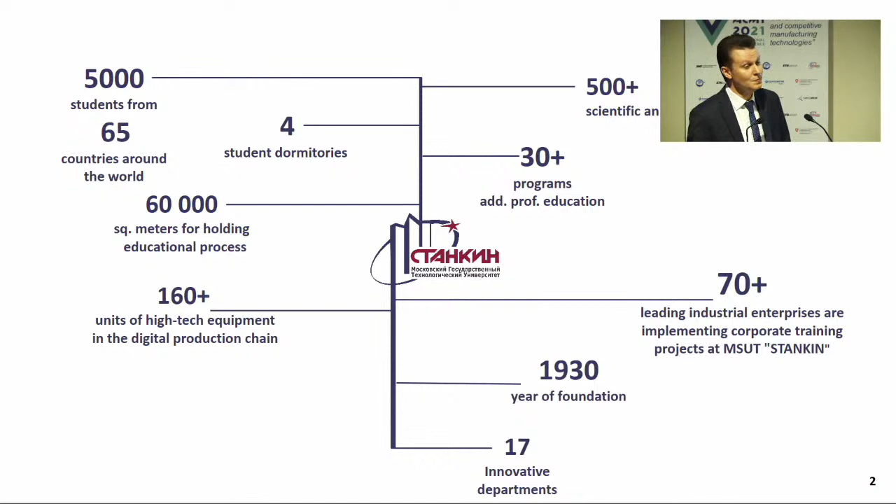In spite of the fact that our university is rather small, we have only 5,000 students and postgraduates, including 800 foreign students from 65 countries of the world.

But we are still a very well-equipped technological university with well-known research schools and graduates.

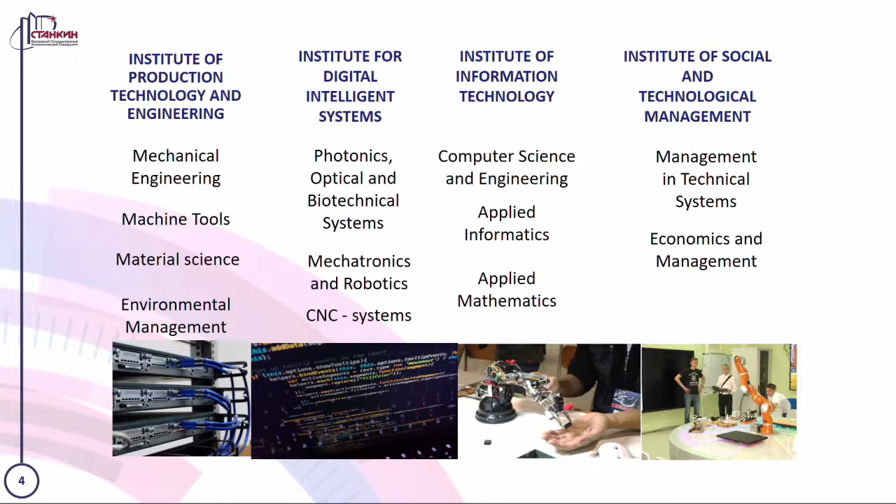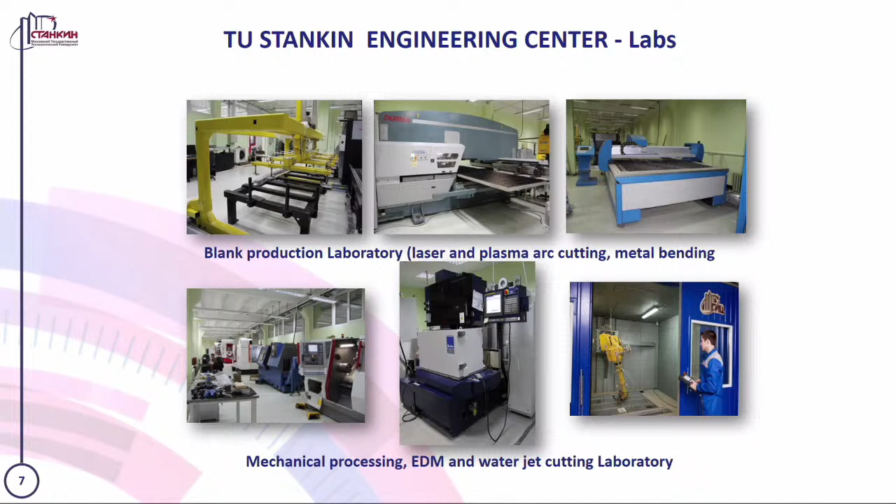Research work takes place in 17 scientific centers and laboratories. We can highlight several research directions: the laboratory of additive production and metrology, blank production processes, machining processes, and also nano coatings and analysis of material properties.

For the last year, in high-rated journals such as Web of Science and Scopus, university staff published, in co-authorship and independently, more than 250 research papers.

Research has been completed on the most relevant trends in developing and implementing additive technologies for making products from composite materials.

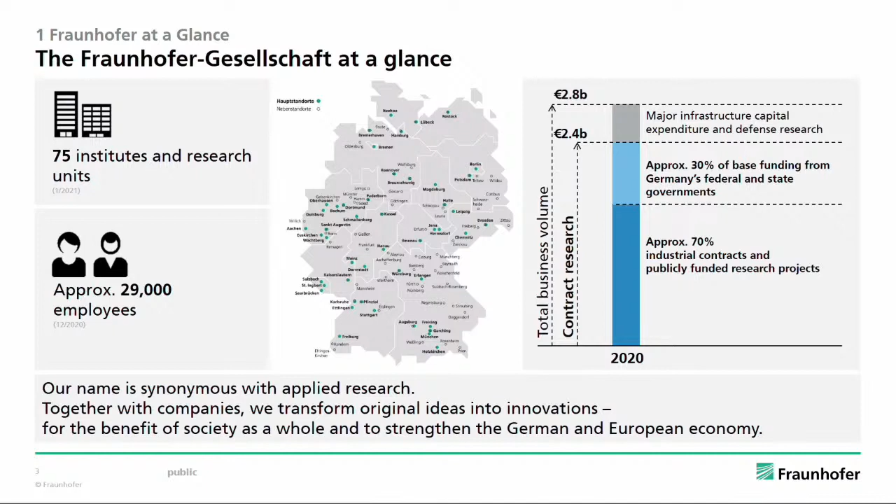The second part is that we win, or that we organize in competition with other organizations, in public programs by the European Union, by the federal government, by the state governments. We call it pre-competitive research with industry. And the third is direct innovation push, exclusive for companies and paid by the companies. This model is very, very suitable to bring innovation push into industry.

And that is the reason that the states want to have Fraunhofer institutes. We increased in the last 6 years by 10,000 researchers and 1 billion euros.

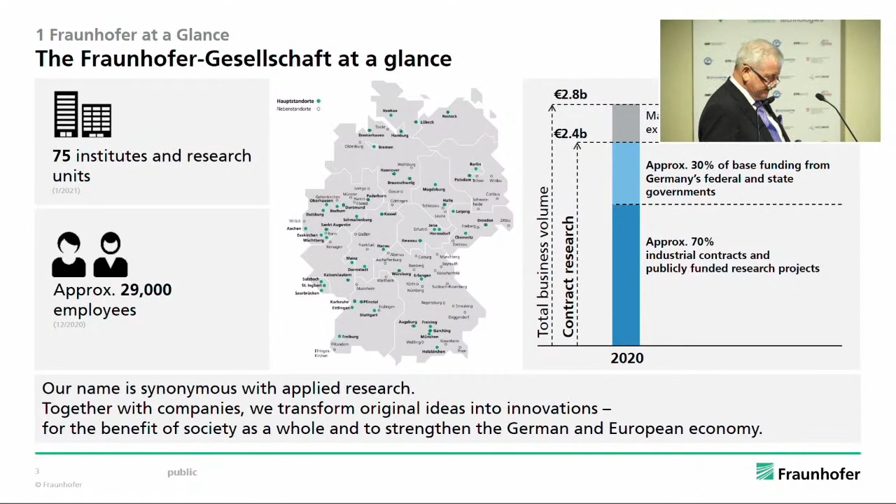Furthermore, we also established 13 Fraunhofer project centers or innovation platforms in Canada, Brazil, Ireland, Netherlands, Poland, Japan, South Korea, Israel, China, and South Africa. Maybe in the future, Professor Kapitanov and Professor Kutin, we could also organize a Fraunhofer project center. It's a temporary organization with researchers from our partner country and Fraunhofer with a common research goal, and the efforts are financed from the German side by Fraunhofer and from the partner organization from the partner country. Maybe we can also organize, as a sign of diplomacy by science, such a center together here in Moscow.

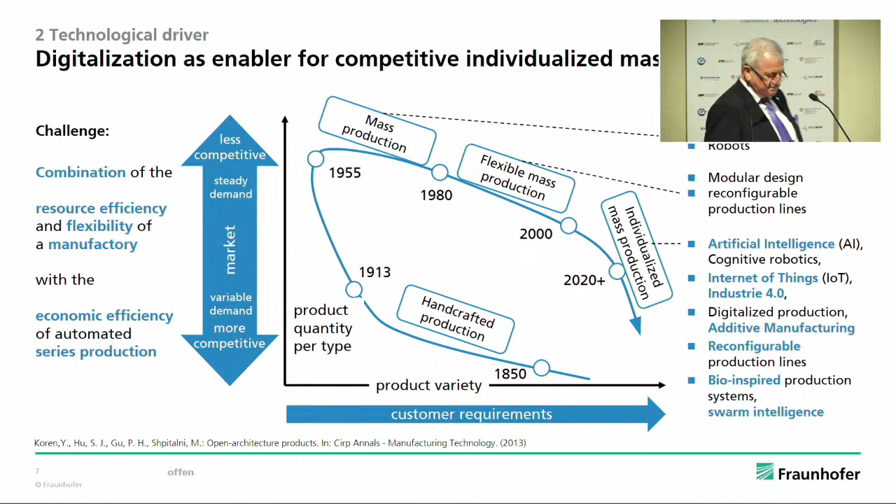Digitization is the key, and it allows for digitally supported and highly variable manufacturing methods that are becoming increasingly important for producing individualized and complex goods in an economic manner, and for being able to quickly adapt to change.

Here is a chart from our CIRP colleagues—Konrad and Andrei Kutin know them—you can see Professor Koren from the United States, Shpitalni from Israel, and other colleagues. They showed in the chart that we come back to the early beginning of production technologies: a high number of products, but every product has a different design, different materials, and so on. That's the challenge.

We can address this through individualized mass production in the future. The precondition for this is to use digitization in production technology, and especially additive manufacturing is a great precondition for this.

Resilience is the ability of a complex system to quickly return to its initial state despite massive, unexpected disruptions, possibly even in an improved form.

In the Fraunhofer Association, Fraunhofer Gesellschaft, we have worked for many years in the field of resilience. At first, resilience was a challenge in infrastructures and in public life. Now, after the crisis, resilience is also very important for production systems and in industry.

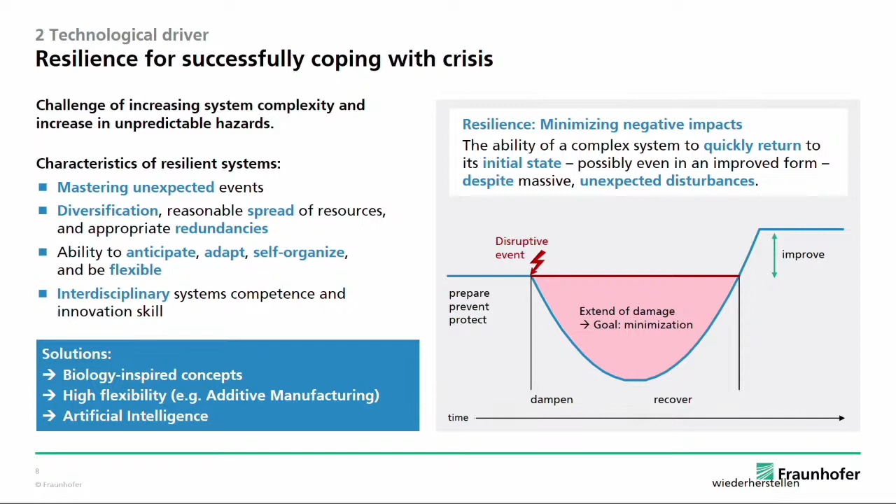We have to look at how to prepare for the event, dampen the dangerous situation, and recover—coming out in a better situation, improving the system or the complete production organization after the crisis.

Biologically inspired technologies, research, and efficient computing is also a great challenge. We work in the European Union in a group called Euro HPC, Euro High Performance Computing. In this club, a lot of countries participate, and the objective in this group is to build up a European ecological system for high performance computing.

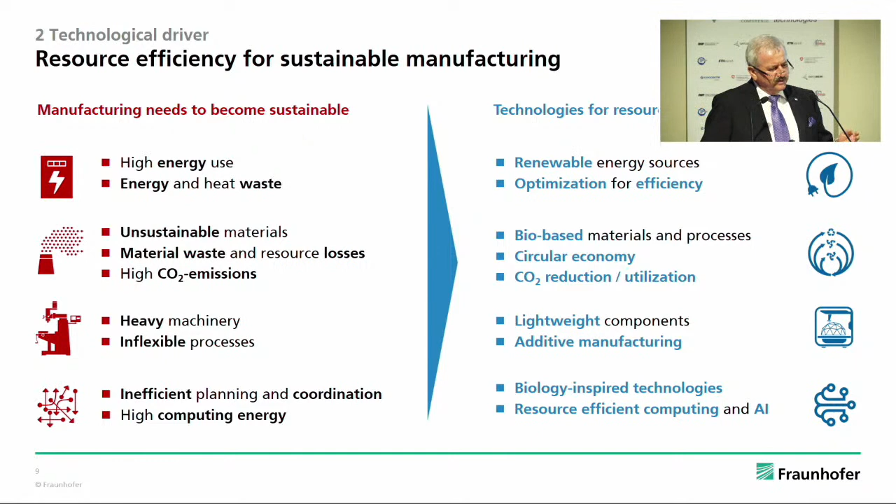In the first wave it was organized that five states got a high performance computer on the teraflop level. It was in Luxembourg, in Czech Republic, in Slovenia, I think in Greece or Bulgaria. And in the second wave, petaflop computers are installed, realized at present in Barcelona, in Bologna, and in Finland.

And in the third wave, starting at the end of this year or next year, we get exascale computers in Germany and in France. The exascale computers have an energy consumption like a factory - it's very high. That means we also have to look for solutions for low energy computing in the future when such high performance computers are combined with production systems.

This next chart relates to energy efficiency, as I've written down on my cards. The question is also, we use artificial intelligence very strongly for production systems, and this leads to high energy consumption.

In the following I would like to show you how the three thematic blocks - additive manufacturing, biological transformation, and digitization for remote manufacturing, a new buzzword after the crisis - how we can find solutions for these three challenges. You can see here in this chart, additive manufacturing is being introduced with a growing number of application areas and brings many advantages. Examples from Fraunhofer you can see here in this chart.

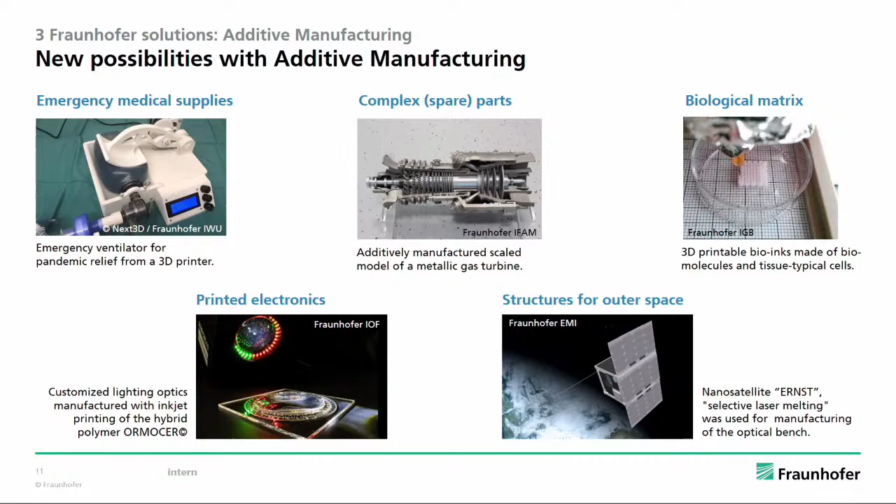The potential of 3D printing has been demonstrated, but the technology is still not fully mature and established. What are the challenges? Fraunhofer is addressing such major challenges within its lighthouse research project, FutureAM, to close the gaps that still hinder additive manufacturing from becoming part of a smooth and continuous process chain.

Konrad, maybe you are an evaluator of this project? Okay, you know more than I do.

The project includes solutions for establishing compatible data formats, enabling a consistent linking of digital and material process chains, improving scale-up, multi-material range, and faster build-up rates, automation for post-processing and quality assurance, and the development of novel software for automated AM component identification and optimization.

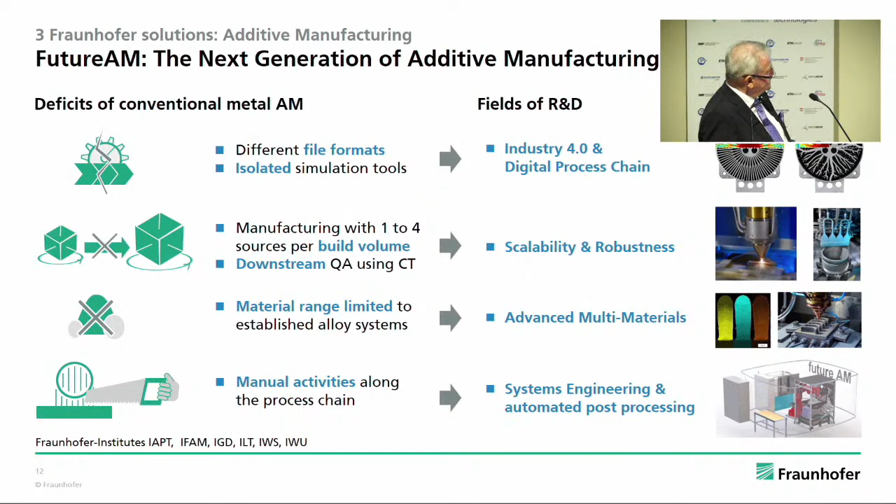Only the consolidation and holistic development of additive manufacturing will achieve the necessary progress for end-to-end economic viability and industrial cross-sector maturity, thus resolving the trade-off between flexibility and profitability. I think you can see the examples here in the chart.

The next topic, the idea of biological transformation, was established in the last couple of years to bring new solutions from specialist disciplines outside production engineering to solve problems in production engineering. I myself can say I was one of the main drivers, Konrad, you know this, also in the International Academy of Production Engineering, CIRP, for this field of research in production technologies.

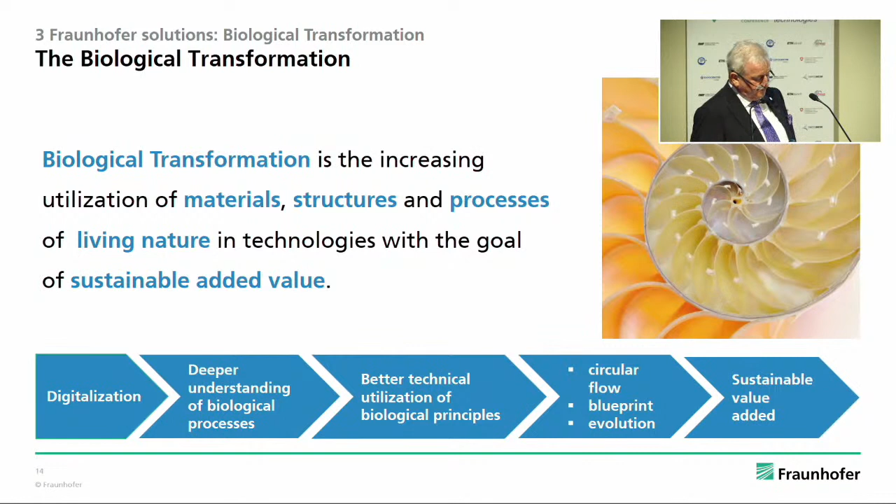Let me give some deeper information about the approach. Through billions of years of evolution, nature has developed many solutions that can serve as models for efficient and effective technologies. These can be material properties, for example lotus effect, structural colors, biocompatibility, or the material composition of mother of pearl or spider silk with extremely stable lightweight properties. Structures and shapes, for example for very good aero or aquadynamics, but also general concepts of nature such as network.

We use swarm intelligence, for example, for logistics in factories, but also for milling strategies in machine tools by swarm intelligence, self-healing, homeostasis, and our circularity process.

Over time, animals and other organisms have developed sophisticated survival and adaptation strategies, for example to camouflage themselves, to get by with as few resources and energy as possible, to protect themselves against attacks, and to survive under adverse conditions. From an evolutionary point of view, all living beings that exist now can be regarded as models of success in design, materials, energy consumption, and so on.

Illustrative examples within the biological transformation are materials like spider silk, bio-based raw materials as substitutes for fossil-based materials, for example in plastics. Structures: nature has developed stable geometries such as snail shells, strong and lightweight constructions like bones, as well as aerodynamic shapes or nanostructures for adhesion like gecko feet, or for weather-resistant colors of butterfly wings.

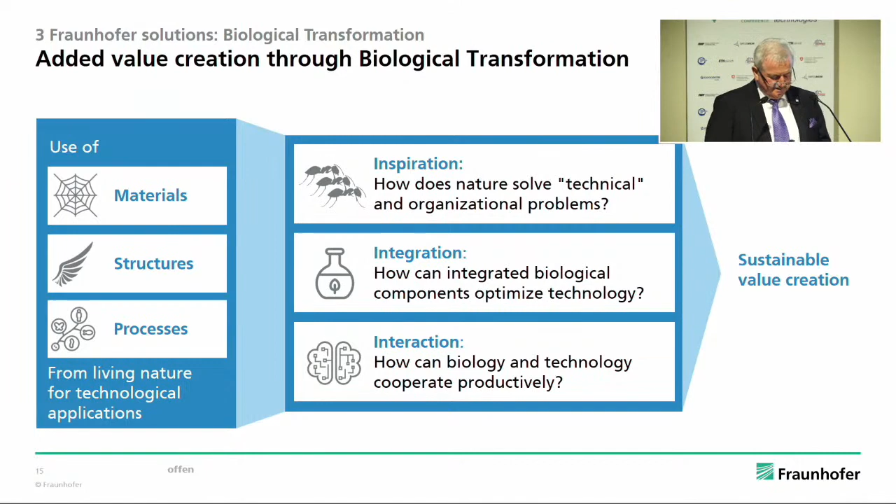Facilitated variation cannot be expressed by several equations that can be applied directly to solve the adaptation and flexibility issues of technical systems. But it serves for a new way of thinking, holistic consideration and optimization. Facilitated variation tells us how to implement traditional artificial intelligence algorithms in this new context. The implementation strategies are oriented along the 4 core aspects for facilitated variation: explorative behavior, weak coupling, conserved core processes, and invisible anatomy.

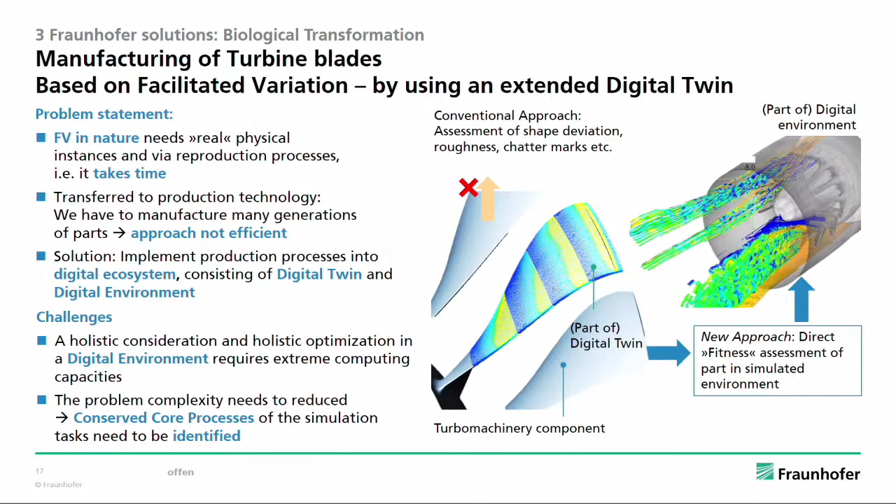And now to digitization for remote, some words about remote manufacturing. As I mentioned at the beginning of my presentation, remote manufacturing is a result of the reaction to the corona pandemic in the last years, and the question is how to minimize personal contact in production companies. Whereas most office workers were able to continue their duties from home during the 2 lockdowns, many factories had to close down or drastically reduce their workforce.

Experience from my own company: in the institutes, we had, during the hardest time of Corona, a presence of around 30-35% up to 50%. In the headquarters we had 15 to 20%, because the headquarters has administration, but the institutes need the labs, and in the labs you need the people.

The situation in companies in Germany was similar to the institutes. Therefore, the question arises if factory workers could someday also take advantage of remote work. Can we organize remote work for the co-workers, for the workers? For manufacturing industries, this could allow for an increase in productivity, improvements in safety and ergonomics, as well as work flexibility and globalized recruitment of skilled workers without the crisis.

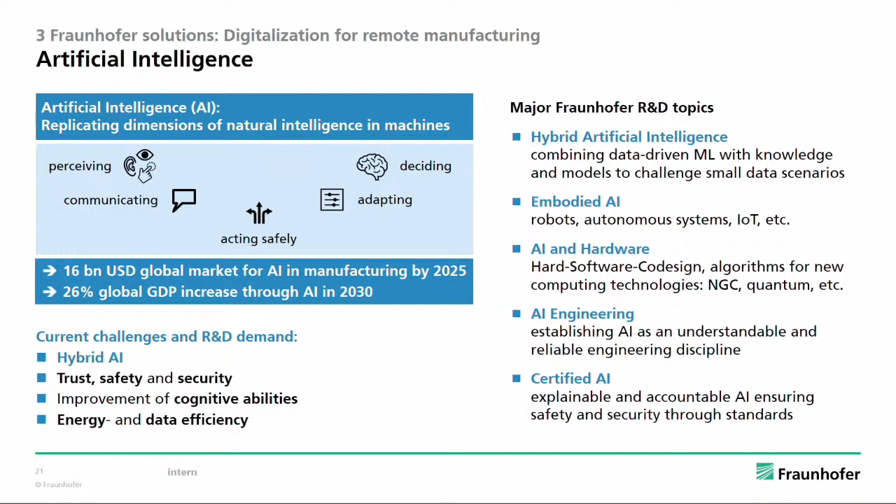In this case, we combine a hybrid technique by data-driven methods like deep learning and knowledge from physical laws or experts. This decreases the data requirement for model generation as well as processing resources and leads to more plausible and trusted models. And now I finish the technical content-related part.

I like to close my presentation with some short brief words on the outlook. Production technology, I think, is also in the future a fundamental basic for society and industry, and will be the backbone also of value creation. Digitization is very essential for innovative and competitive production engineering, and the biological transformation can help us decrease material consumption, decrease energy resources, and also decrease the impact on the environment and the climate. Thank you so much for your attention.

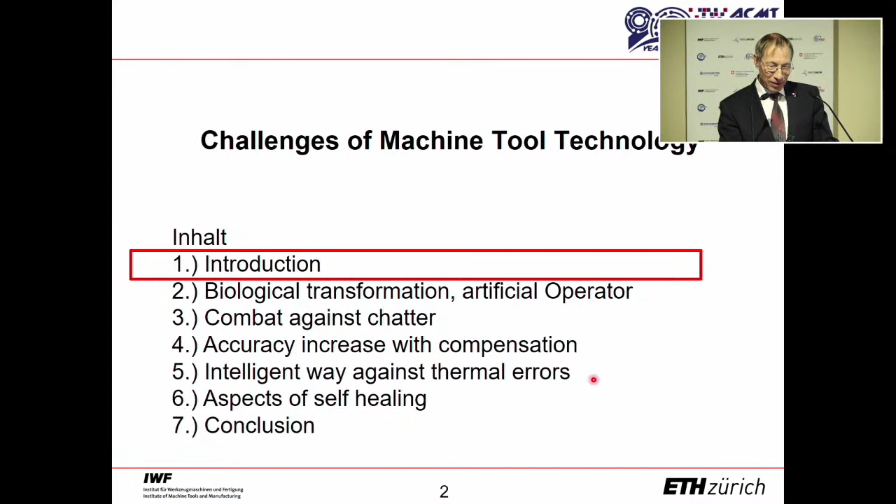Where I want to go here is especially in the direction of the artificial operator. The question of chatter was also mentioned by Raimund, but what can we do in this field of intelligence against chatter? The question of increasing accuracy in a situation where costs are increasingly growing due to the decaying limit benefit when trying to do machine tool improvements in the normal mechanical way - it's nearly not possible. Then the intelligent way against thermal errors, the aspect of self-healing, and I'll end with a conclusion.

So let's start with the question on machine tools. This shows the importance of the machine tool. Every year, machine tools with a value of approximately 60 billion euros are created. Two-thirds of them are cutting machines. This is a really important contribution.

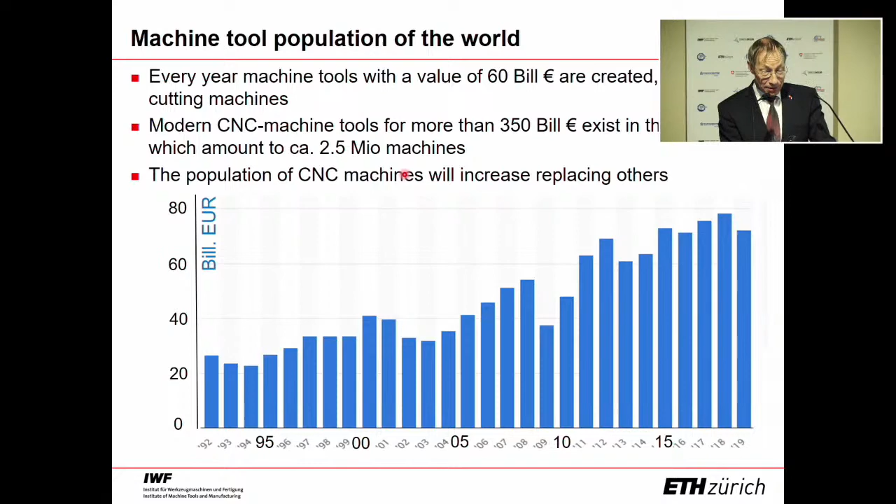That means we at the moment have a population, a value in machine tools existing of 350 billion euros, meaning 2.5 million machine tools are running around the world. For these 2.5 million machine tools, we need technology for the future. We need to apply whatever the co-developing enabling technologies provide. Naturally, the population of these CNC machines will also increase by replacing other low technology machine tools in the world.

Then there is something that needs to be taken into account if we look at productivity and efficiency. Approximately 2 to 3% productivity increase per year is necessary. In the first step, I'll show you what was the source of this increase in the past. We had enhanced tools, machine tool architectures and structures with better performance, chatter resistance, higher power densities in the drives, higher cutting speeds, and so on - a lot of different things that enable year by year this 2 to 3% productivity increase.

And the result is shown here. In former times, for a grinding machine, it was mainly the grinding time that was reduced. But on the other hand, we must not forget the auxiliary process time, especially automation - and I want to address this directly to Professor Kapitanov, who is an expert in the field of automation - automation also plays a major role here. The question is what happens in the future. We'd like to adopt properties of biological systems like sensors, sensor fusion, cognition, machine learning, and so on.

What we also saw is, and this might be one of the major outcomes of additive technology, that they show us how fast setup of a product can be made. But we need to discuss, can we adopt similar technologies for cutting in this field? The so-called 5-minute machine: after 5 minutes we want to make the first chip if we have a CAD model, the same as for additive manufacturing. After 5 minutes we are ready to start production. But if we were able to make the first chip after 5 minutes, milling will be much faster.

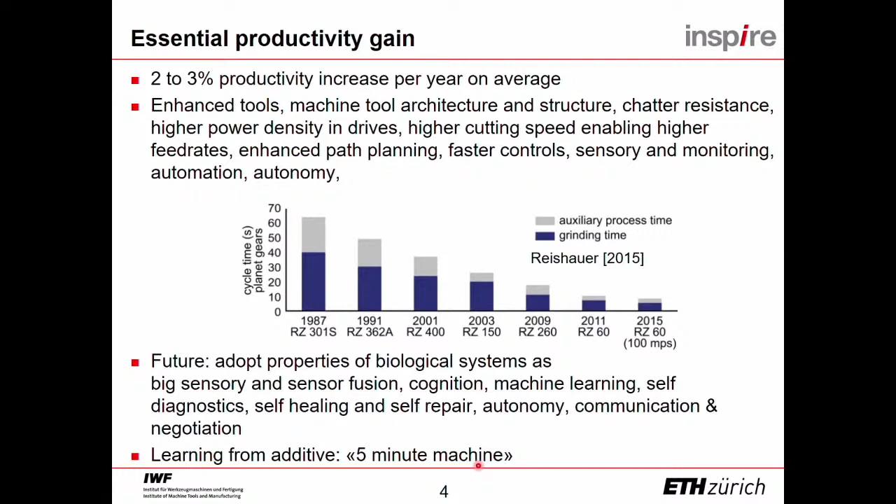And the question is, where is the limit between conventional technology and additive manufacturing technology? Where is the break-even between efficiency, productivity, costs, and naturally also quality?

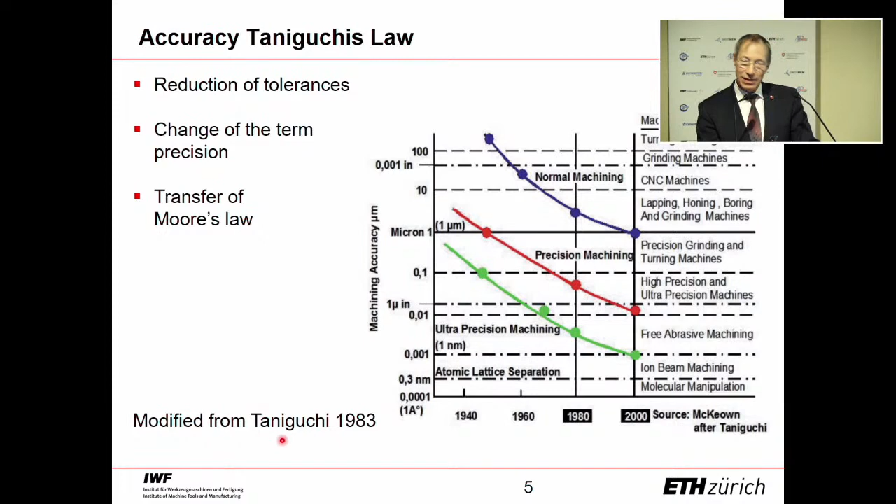Another challenge is the increase of accuracy. This picture is a fairly famous one, created by Taniguchi in 1983. That's why it doesn't last beyond the year 2000, and was somehow refurbished to make it easier to understand by our colleague McKeown. But it shows that machine tools that happened to be precision machine tools back in the 1940s are, in the meantime, normal machines. That means all machine tool manufacturers are in a steady increase of accuracy, reducing uncertainties of machine tools, and positioning inaccuracies must be reduced.

This slide is actually deduced from the so-called Moore's law of increasing structure density. Increasing structure density means we are capable of creating, with less material, a denser storage capacity, which enables us to increase functionalities per chip, decrease the structural size of the chip, and we are heading towards a situation where the structural size is in the vicinity of an atom. The question is, how do we continue this increase of structural density? In the past it was always a question of lasers, of better focusability and structuring capabilities. Does that come to an end? The answer of this slide is: it does not come to an end.

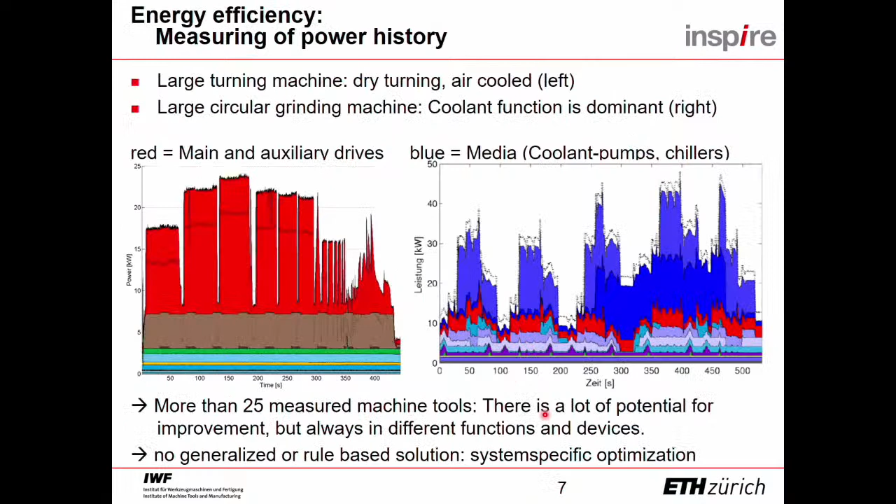We have quite something of technology before us. So we go into the third dimension and, as pointed out by Professor Neugebauer, we find new possibilities to increase the performance of computers. Also, energy efficiency was already discussed, and it was really difficult for us to see what is actually the proposal from academia to reduce energy utilization.

You see that doing the utmost possible for a machine to be prepared for the future does mean that we have a lot of over-expenditure of energy in terms of what we really need. In the end, we find that it is not a general rule that can be applied to all machine tools, it must be treated point by point. But I want to also point out on this slide that energy efficiency, saving energy, and renewable energies is a very important topic.

On the other hand, the Earth is equipped with an amount of materials of different kinds, and when it is used up, it is used up, while energy is supplied continuously by the large power station that we have in the heavens.

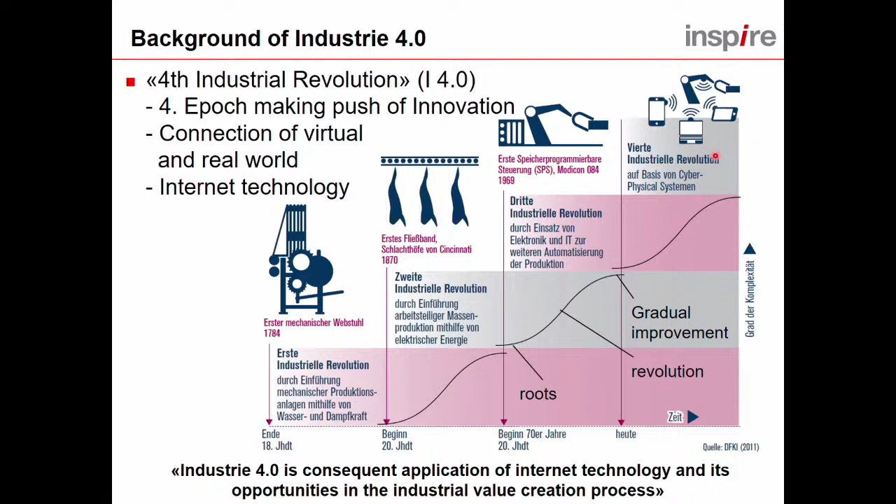Then Industry 4.0, I actually do not need to discuss that with you, this is a challenge that comes up with internet technology. Something really interesting that happens in machine tool technology is that in former times, the control of machines was running as a forerunner to the development of electronics. In the meantime, it totally changed.

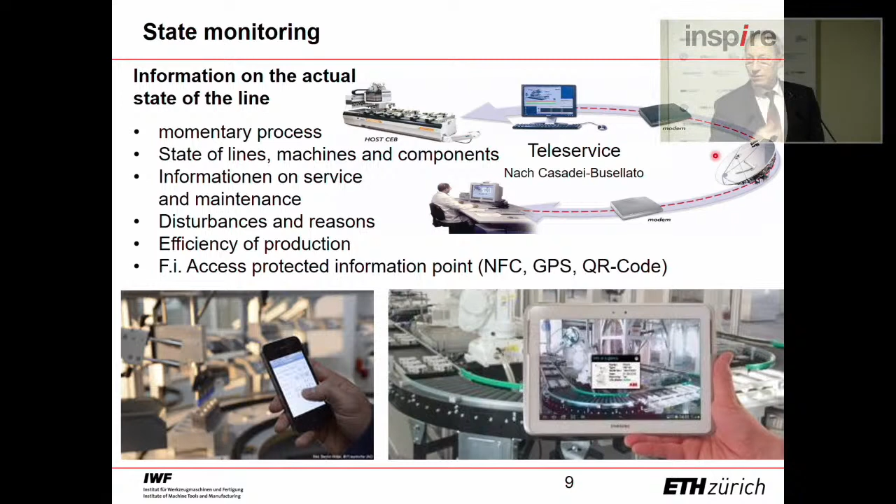What you see here is that we start to control machine tools with actually consumer products, with smartphones, tablets, and so on. The benefit of that is that we are capable of providing, for an extremely cheap price, all the different sensors, actuators, and apps for the users of machine tools.

So with this structure of apps, you can easily take the whole world as your development group, developing new performance, new programs for the machine tool.

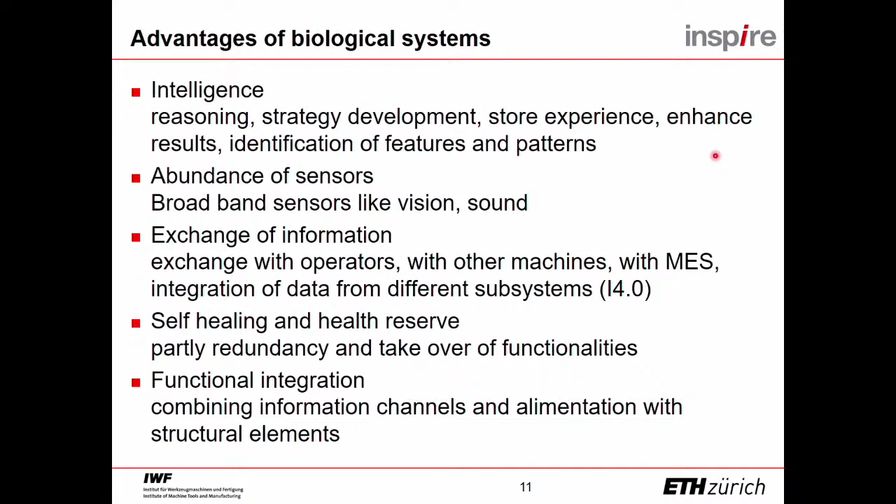So then I go to the biological transformation. When we started this, Raimund, we discussed whether biological systems are actually superior to our technological systems. And the truth is there are some aspects where they are much inferior to what we are doing. There's no horse running at 250 kilometers per hour, and I also do not know a whale capable of carrying 16,000 containers over the ocean. So in terms of power, force, and speed, biological systems are by far inferior to what we are doing technology-wise.

The question is, what can we actually inherit from biology? This is mainly intelligence, the possibility of reasoning, strategy development, and so on. Biological systems typically have an abundance of sensors. On a square centimeter of our finger, we have 10 sensors for coldness. The question is, what can we do with that?

The exchange of information, we are extremely efficient, even over several thousand kilometers from Zurich to Moscow, and also to Munich, respectively Dresden and Chemnitz. Then the question of self-healing, and this is something we'd like to point out later on, because a lot of things we can inherit from biology have no value without this possibility of self-healing, and then functional integration.

So if we discuss materials, for instance, what is the performance of a normal tree trunk in comparison to our fiber-reinforced materials? There, our fiber-reinforced materials are by far stronger than the tree. The interesting thing is adaptivity to the environment, and naturally the functional integration, that the tree trunk is not only there for load carrying, but also for providing nourishment and providing information to the tree. So these are the 5 topics we really need to deal with when we discuss biological systems.

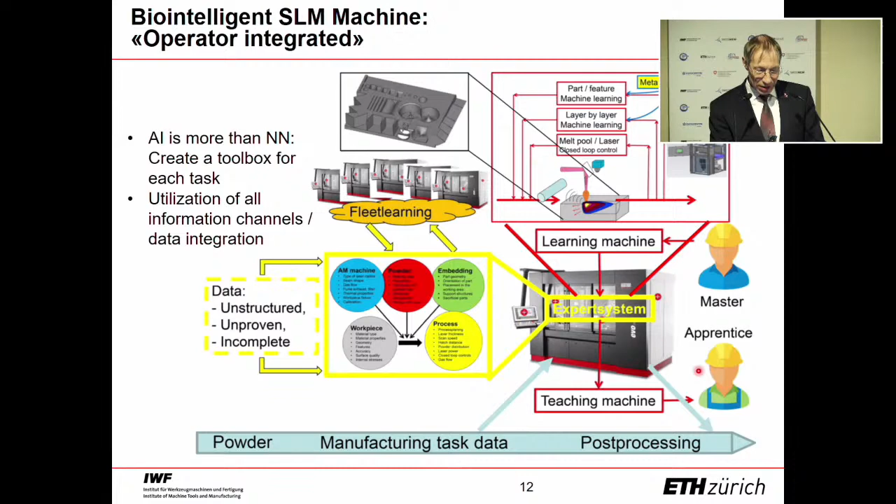Yes, we can make a plausibility check. The question, and this is something really important, is that at this place ethics comes into play. In all topics of this biological transformation, ethics becomes a major topic.

So then we need some monitoring, which you see here on top. We have three cycles that the machine tool is capable of learning. It starts with a normal closed loop control. Normal closed loop controls are not artificial intelligence, but they are anyway something like adapting the machine tool. But we have different layers of machine learning that are stacked above these, and it's important to see that this is a technology for individual parts.

So it is not useful to teach individual parts. It is useful to make a feature recognition, feature separation, and to teach these individual features that can be reused to make this geometry. So here, fairly swiftly, one possibility of sensors, and this is something also that is bio-inspired.

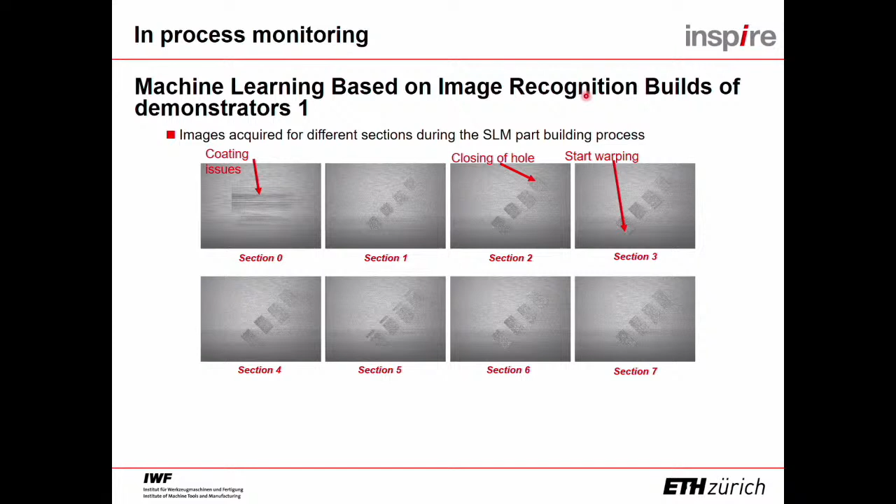We have eyes, we can look and have the possibilities to recognize colors, to recognize the full field of what's happening there. Especially optics and acoustics are sensors that are really capable in biological systems. That's why the higher biological systems are equipped with that.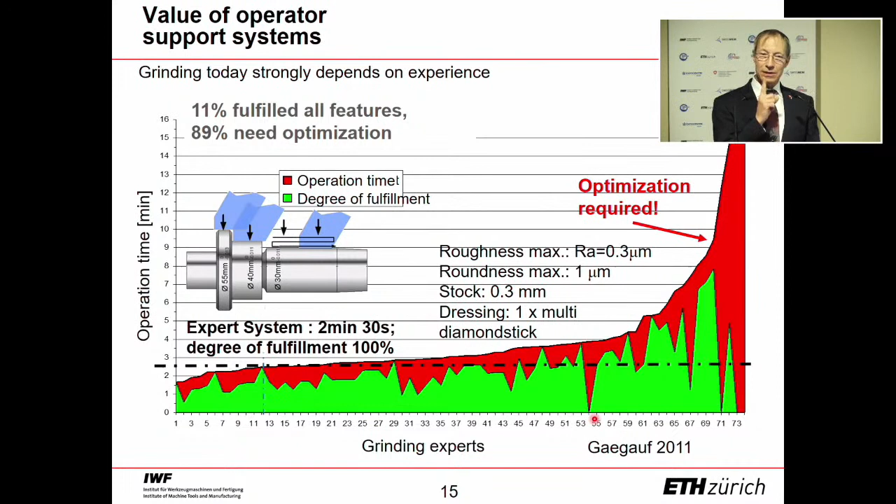experts need iteration. The second interesting thing is that in terms of a fairly crude expert system, we are capable of being better than most of the experts. So only 11 experts in this test were better. And that means that an expert system is something really valuable in terms of increasing productivity, in terms

of also reducing the energy expenditure, because during the time where this machine tool is being set up, you need to supply energy to the machine tool. The last thing is that we can do it better as humans than this expert system. So the learning ability of the expert system is something that is really important.

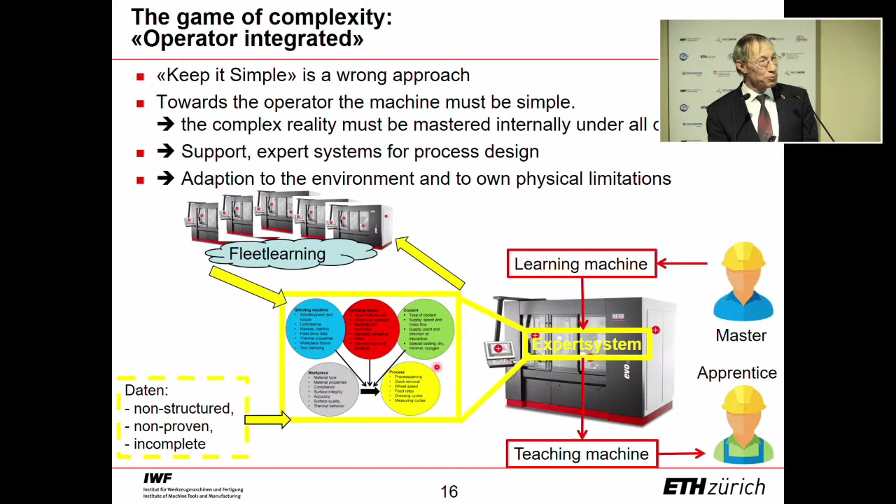And with this slide, I want to point out that it's exactly the same structure that we use. I also want to point out that the approach 'keep it simple' is a completely stupid thing, because the problem with keep it simple is that we have to cope with the full complexity of a manufacturing process, and manufacturing processes are complex.

Therefore, if you want to interpret this slogan 'keep it simple' correctly, it must be keep it simple towards the operator, but then the machine tool needs to fulfill all the problems coming up from the complexity, which is actually the task of having persons or having the operator integrated.

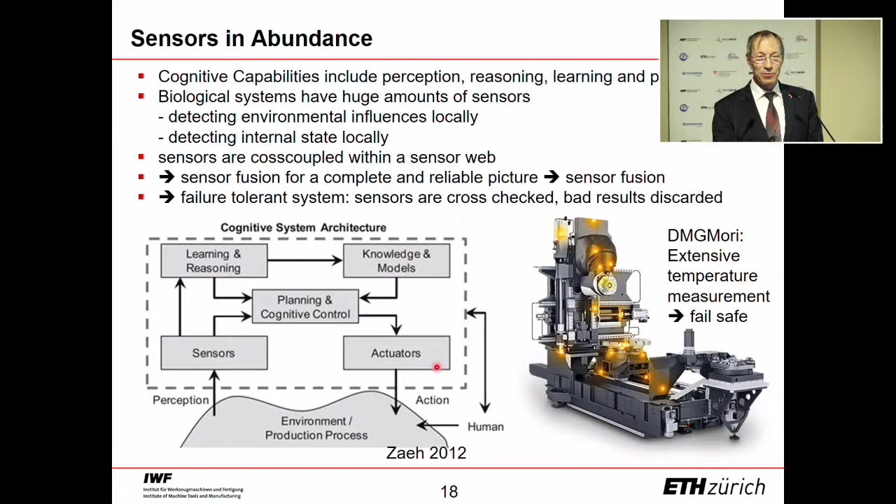Okay, so then sensors in abundance. When I started discussing temperature compensation of thermal errors on machine tools, and I asked the Swiss machine tool maker, I would like to have an additional thermal sensor, temperature measurement sensor on the machine tool. They said, no way. The sensor is an additional component that first costs money and second increases the downtime of the machine, so we shall not do it.

In the meantime, some six years elapsed since that time, and you see that even large machine tool makers make advertisements with a large amount of those temperature sensors to really gain control over the performance of the machine. It's interesting to see that in the meantime we learned that, for instance, sensor fusion is something that's interesting. We combine the information coming out of different sensors, and we are also capable of making plausibility checks.

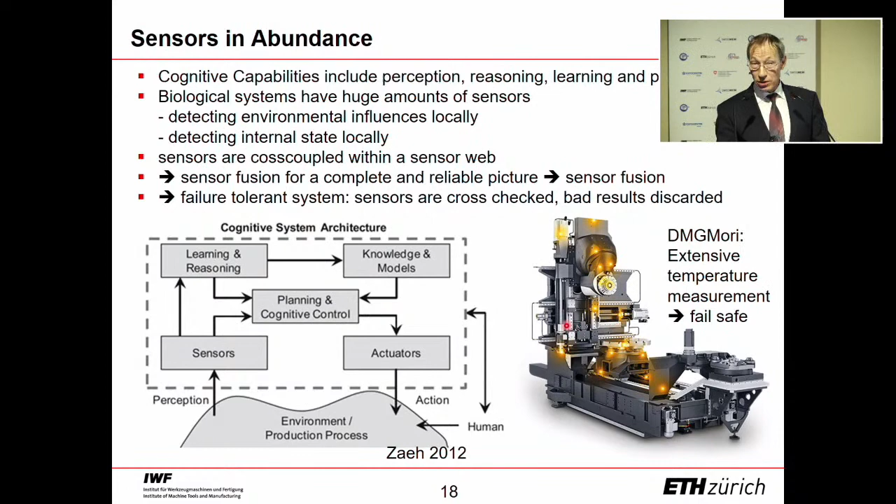So if one of these different temperature sensors fails, the other ones can check whether what's happening is plausible, and then mute that sensor, as we are doing day by day with the sensors that we have at hand.

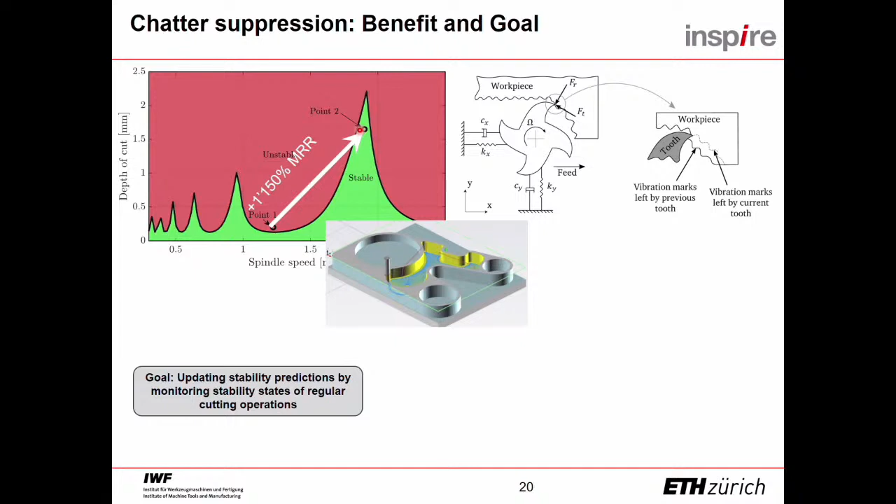Then the question: chatter happens at different places in different ways. So the goal is updating the stability prediction by monitoring stability states of regular cutting operations. The machine is cutting at different places, and naturally the stability is different at these different places. We measure at one place, another place, a third place. Then we ask ourselves, what is actually the updated prediction?

And in the end we find perhaps something where all the chattering points are sitting outside of the line and the non-chattering below. Then we achieve the possibility of exploiting the gaps between these stability lobes where we achieve higher stability. The problem is that these lobes are changing very fast, without any knowledge of a human person.

And the topic is that chattering in machine tools is one of the most researched topics in manufacturing at all, but there's no industrial solution available still.

So the question is, what shall we do? Now the savior of all our technical problems is coming up: artificial intelligence, self-learning technologies.

We have two possibilities to deal with the problem. We have this analytical approach with physical modeling, but the problem is low prediction accuracy. On the other hand, we can use a data-driven model, but this requires an unaffordable demand of experimental data.

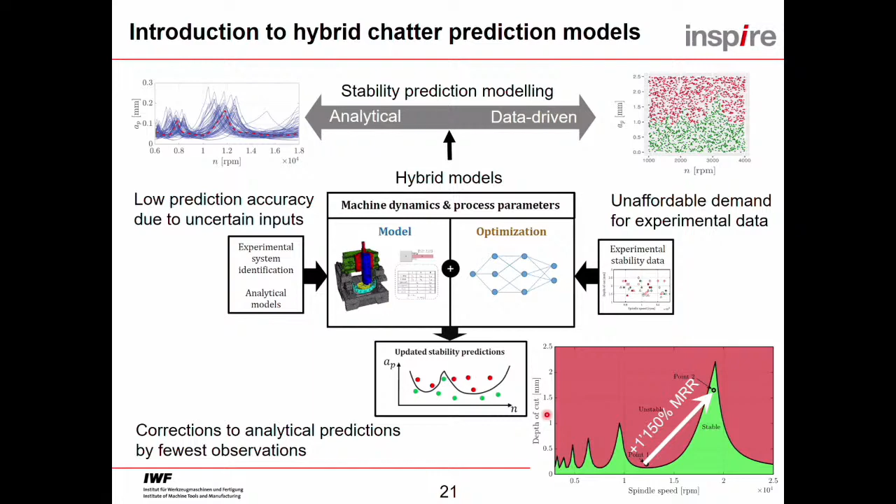So the solution would be something in between, to combine the benefits of both: a model with database optimization. In the end we will be capable of adapting this stability lobe diagram from whatever the machine witnesses.

And then we see that it is necessary to teach these models as an artificial intelligence topic. Besides this network, we have model inputs, and out of these model inputs we generate a stability model. This enables us to predict.

And then we compare our experimental data: does it chatter, does it not chatter? So we need the sensor on top, compare it, and then reorganize or retune our network weights.

The problem here is that we cannot exploit each and every experiment, because we have something like a digital situation that needs to be learned: either it chatters or it doesn't. If you predict chatter and it chatters, you've gained nothing, you only gain something if you have a contradiction between these two models.

And then comes the problem: machine tools are changing on purpose. We want to exchange the tool, exchange the clamping situation, and that means in the end we end up with a lot of different models that need to be tuned, giving in the end a stability model as a physical combination of these different models.

So physical combination of these models is something essential to win over the variety of these different equipments of machine tools.

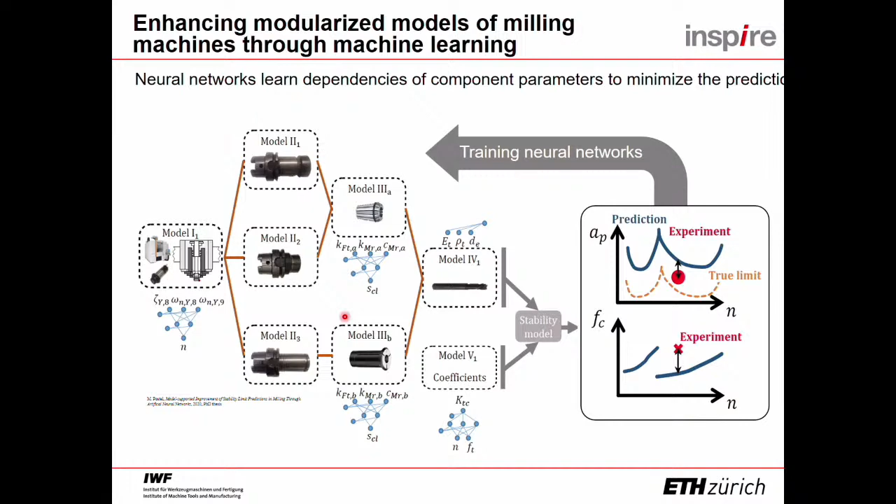And then the question is, can we enhance that? Yes, we can. So what we propose at the moment, in collaboration with an industry partner, a control manufacturer, is this Ensemble deep learning.

That means we start with a lot of learning of neural networks, trying different starting points, and gain different results. The first thing is the original predictions you see here, the analytical model prediction, then we have the training of the network with these different points.

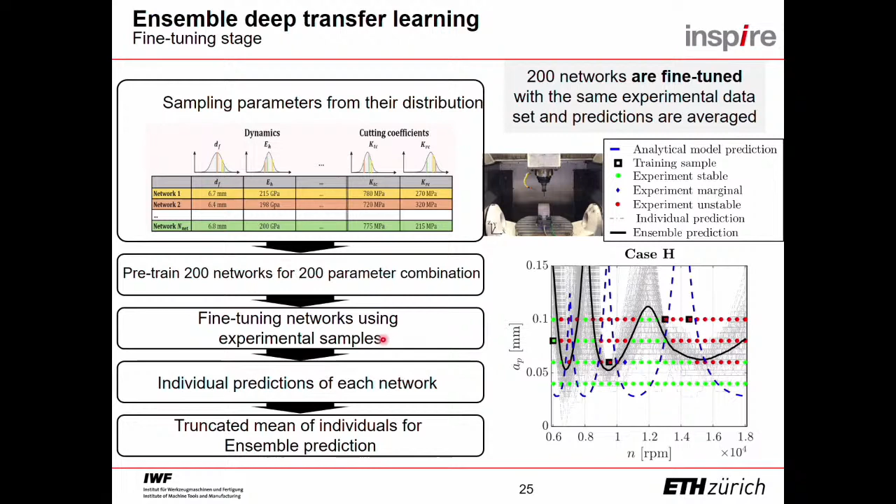In the end, we get individual predictions for any different setup of this artificial intelligence network, and the goal is to average out these different events from these different trained networks. Does that really help? Yes, it does. The green is the non-chattering part, the red is the chattering part, and they are clearly separated by the black line.

So then, compensation. The question is, how do we compensate machine tools? The necessity is to rethink the machine tool at this point, because you can only compensate what is predictable.

And if we ask for design for compensation, the first task is to have repeatability. The second task is to have repeatability. The third task is to have repeatability. Nothing goes over repeatability. Only if it is repeatable, and this is what we need to achieve.

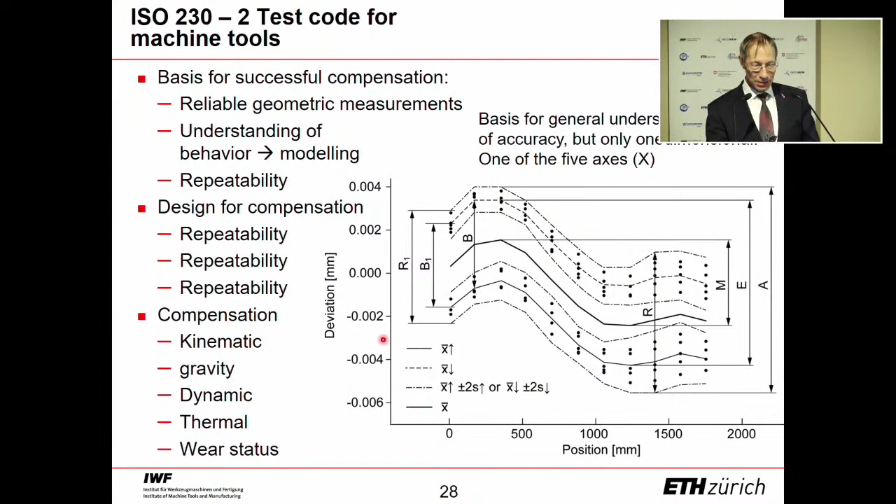If the machine tool is repeatable, we gain possibilities to enhance it by compensation. Then the question is, what all can be compensated? We can compensate kinematics, gravity, dynamics, thermal behavior, and wear status.

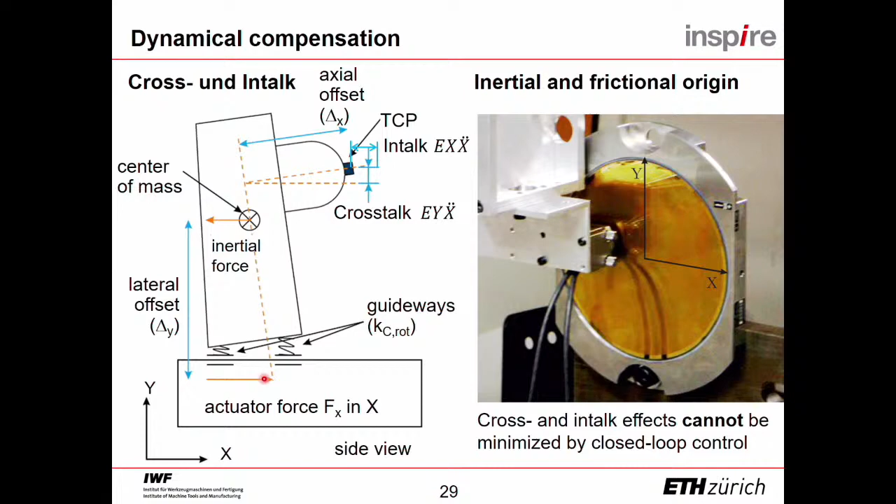This shows the dynamic compensation, compensating the crosstalk coming from the distance between the center of gravity and the attack point of the drives. This can actually be predicted, and this is something that is deterministic and repeatable, and can be used for enhancing the accuracy of the machine tool.

So the problem with model-based enhancement of machine tools is that we typically have models that are far too complex to be evaluated in due time. Therefore, it is necessary to have advanced models and meta-modeling. This is the task that we look for in each and any compensation strategy.

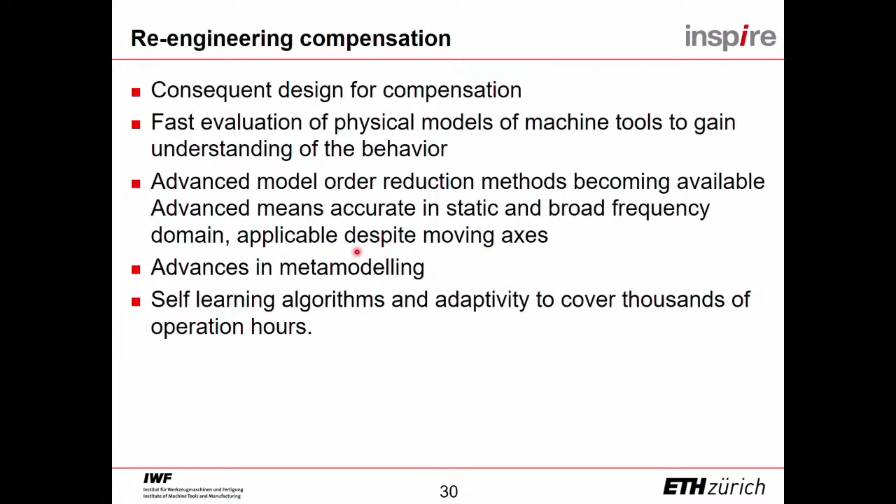I want to show you a possibility for dealing with thermal compensation. In old times, so-called resource-based technology asked for air conditioning of the job shop where we put our machine tool. Now we want a machine tool capable of ultra precision but operating in a standard environment to save energy. Therefore the only possibility is to be a little more intelligent and prudent: have models, know how the machine will behave, and set up physical models.

But the question is, are these physical models sufficient? Here I show you how any compensation strategy works, something like a morphological box. We start with sensor technology - and excuse me that I include the NC program as a sensor, because from the NC program we know how the machine tool needs to behave. Then we have the intelligence of the model, and an actuator technology, which should be the axis of the machine as far as possible.

Perhaps also some additional axis, but we prefer to use the same actuators we'd actually like to have. Here you see physical field equations that require a lot of evaluation, so it's interesting to move toward reduced models with reduced information content compared to the physical model. But then we need something different to enhance this model, so we ask for different sensor technologies and put it into some reduced modeling.

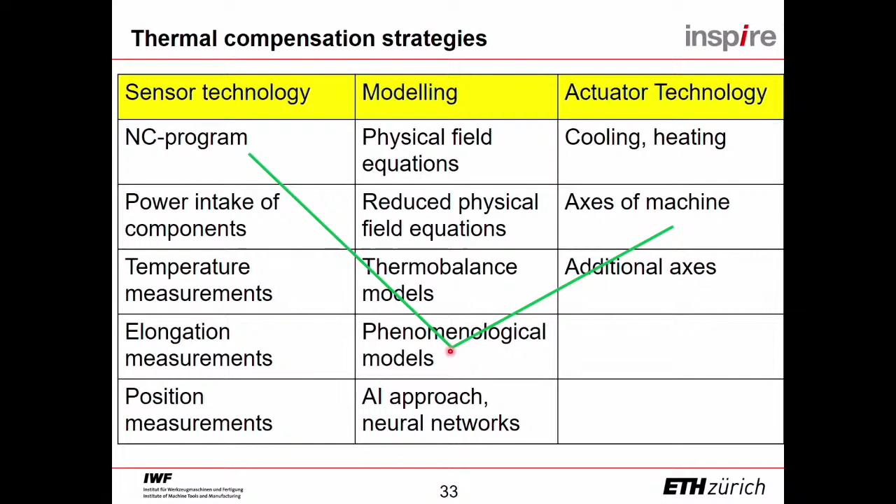I'll show you this phenomenological modeling in a few seconds. The question is what can be enhanced to make this phenomenological model work, and how does a phenomenological model work? So we have a physical equation, and this physical equation is complicated.

We reduce it to a simple first-order differential equation. This contains at least the history from this compensation technology, and all the parameters here need to be adjusted by parameter identification.

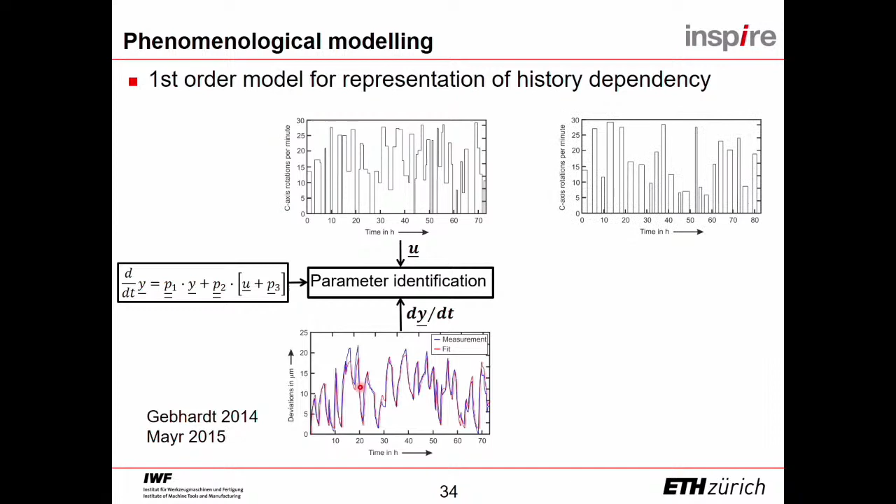So we ask for movement of the machine tool, we ask for the deviations of the axis positions, and then we make a parameter identification. If we've done it well, we get a very good comparison between those two things. Then we take another one, use the same prediction, and in the end check by measuring whether it happens or not.

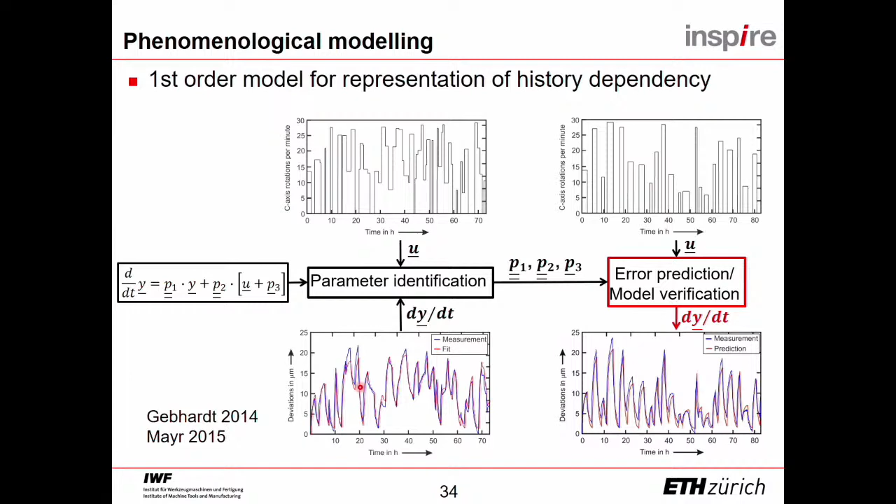You see that we have approximately 80 hours - a machine tool that only lasts or works for 80 hours is nothing. So what we need to do is retrain this model so that the parameters we identified become adapted to the situation of the machine tool. This is how we do that - this is the utilization of the model after training. Then, from time to time, we measure the position of the machine tool.

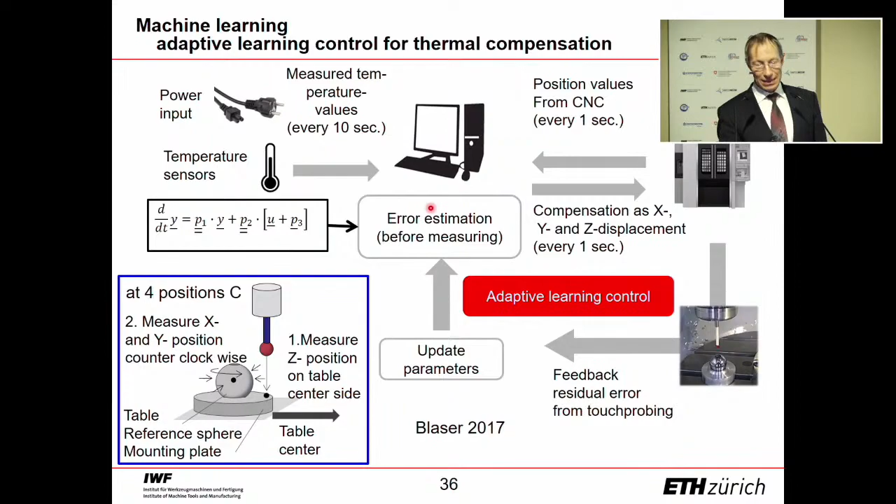After measuring the position of the machine tool, we feed back this information into our model, and then we have a new model, and this actually lasts forever. So let me skip some of the slides, otherwise you get nervous.

The last thing I want to show you is the self-healing topic. We generated some surfaces that are functional surfaces, known from the lotus leaf, that show super hydrophobic behavior. But when you touch the surface of a lotus leaf, the super hydrophobicity is gone. The only reason this plant survives despite touching is that it is capable of regrowing the performance of the surface. So when we discuss functionality, we need to discuss the regrowing, the self-healing topic.

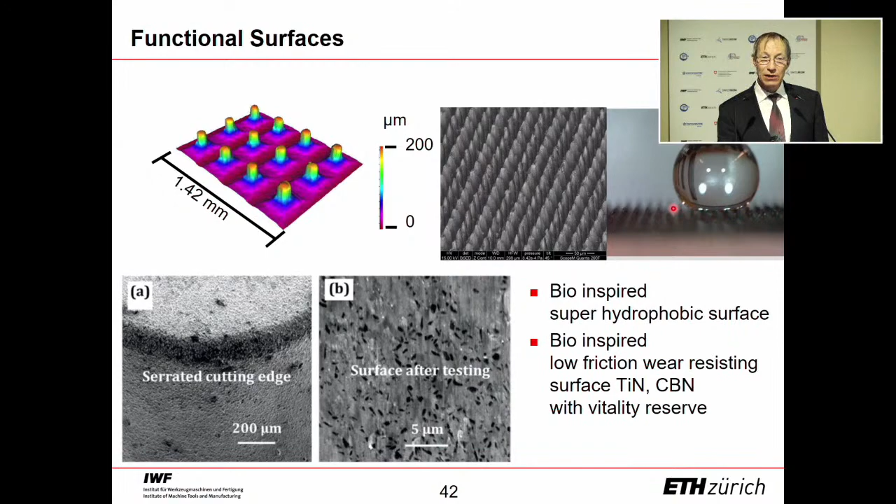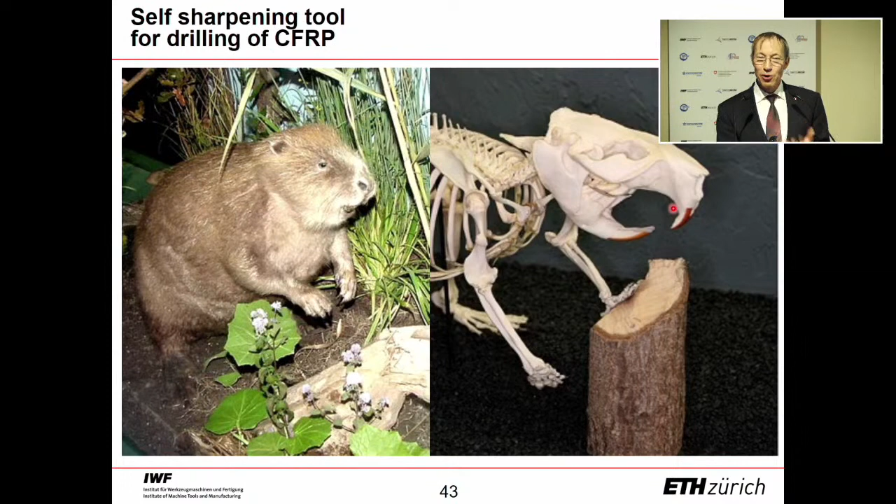I want to show you one aspect of self-healing. This is a beaver. The beaver has teeth that sharpen themselves. If the beaver does not cut wood, the teeth grow ad infinitum until the poor animal dies. This is interesting for machine tools. We would like machine tools that are self-sharpening, that keep their sharpness due to the wear process. The problem is we cannot grow the material from which the tools are made, but we can move the CNC axis so that the length of the tool appears longer after some time.

Let me come to the conclusion. All these artificial intelligence topics are somehow here in this so-called Gartner hype cycle, dropping down into the trough of disillusionment. We had that for artificial intelligence some time ago, the so-called artificial intelligence winter. The question is, what are we as researchers doing? We need to act in this situation, because here we are capable of bringing things into the industry.

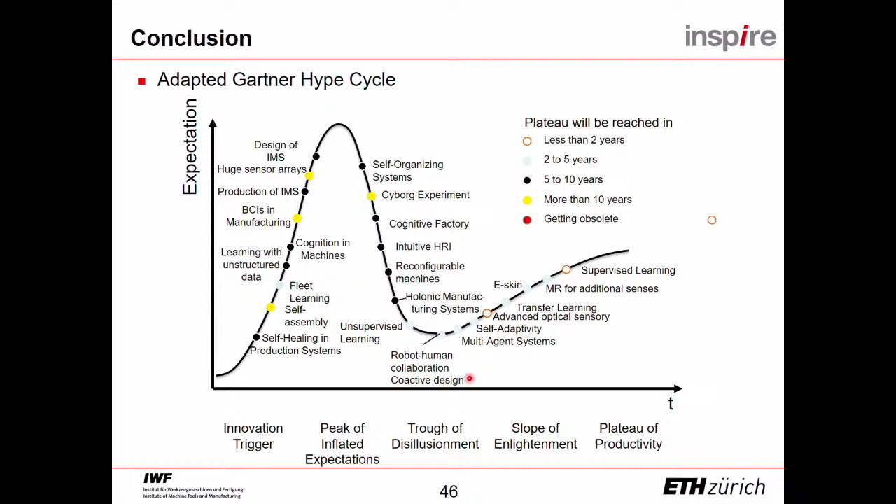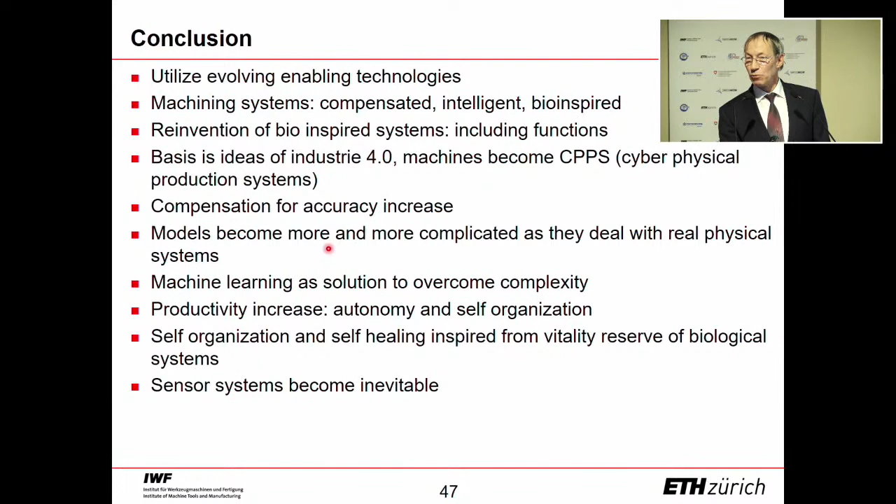So I come to the conclusion. The important thing is that we use the evolving enabling technologies. Naturally, the machining systems become compensated, they become intelligent, and they naturally become bio-inspired. I want to show you that compensation for accuracy is something necessary to be done, and we need to have models. These models become more and more complicated, and that means we have to introduce these artificial intelligence topics. Thank you for your kind attention.

Thank you very much, Professor Wegener, for a very interesting report. We can imagine that you've done a lot in your institute, but it's really very interesting. I think maybe we shall invite you for our students to make a lecture or two lectures in this field. As an honorary doctor of this institution, I'm obliged to do that. An honorary doctor should work a little bit for our university too.

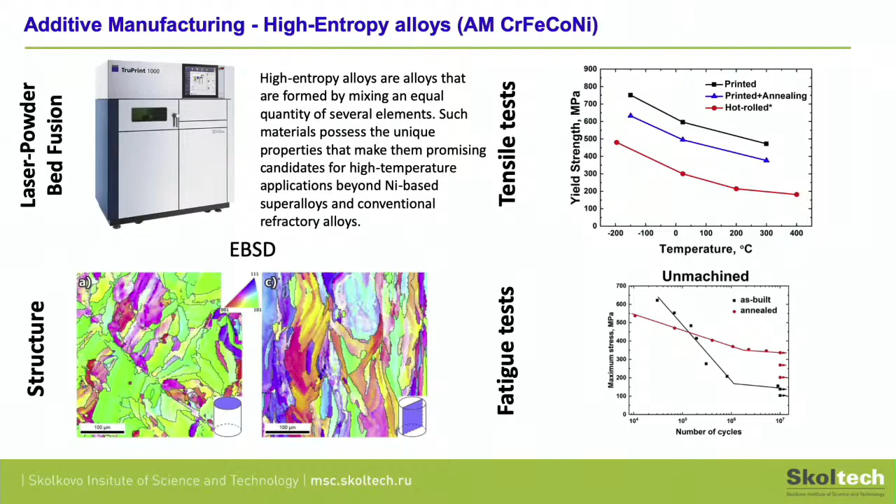This is something to be studied, and that's what we are doing, trying to compare as-built and annealed products. I'd like to underline, since there's no physical background on this, a lot is done in the labs by experimentation. After that, we normally put it in high pressure torsion, aggressively squeezing this material, and it shows that the prehistory from additive manufacturing is destroyed because of this. All this domain structure is ruined in the same way it would be if it were casted. At the very end, the horizontal line, the limit, is achieved the same in terms of micro hardness. So the material is forgetting its prehistory, how it was created, which is also important to learn and understand the consequences of what we're actually doing.

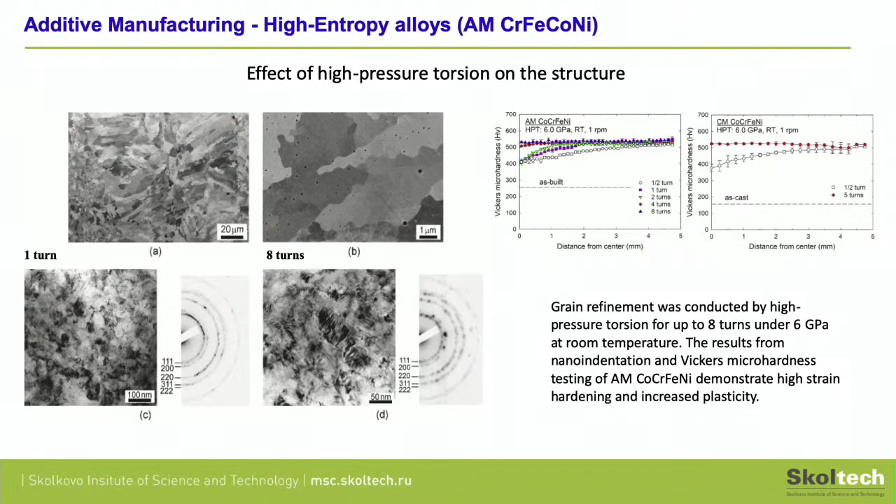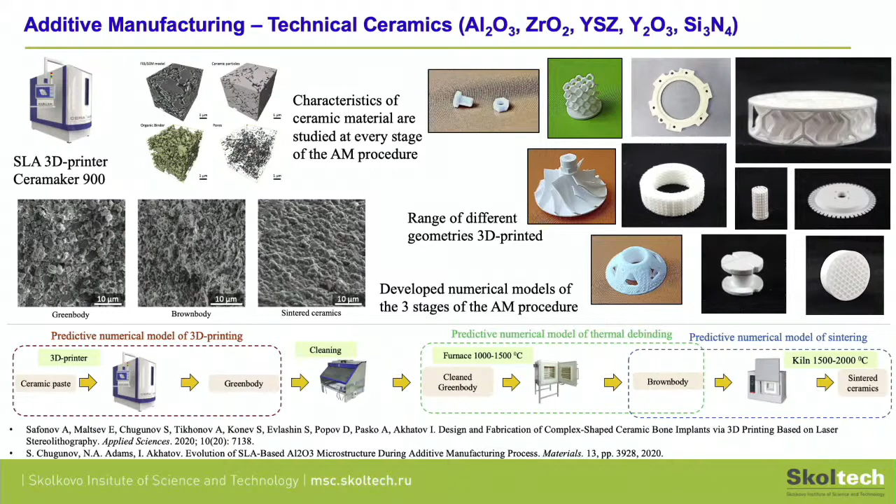This is a piece of art, how to do it, and it resonates exactly with the point you mentioned, that a qualified operator is supposed to be attached together with this machine. It doesn't work like you push a button and get the result. But after this learning, we found it's important to understand how the structure of these materials changes, and we do this including mathematical models of all these processes - digital twins of all three steps: predictive numerical model for 3D printing, predictive numerical model for thermal debinding, and for sintering. There are several different time scales of these processes, and we develop all these models to be able to predict the final product before it is printed.

Now, the third one in additive manufacturing, which was well mentioned today, is a very poetic application: we print with lunar regolith. This is interesting. Someone might say, why do we care about that? Well, like everybody, we're dreaming now that we would like to fly to the moon one day, maybe our kids, maybe our grandkids, and in that moment we would like them to know how to use the material they find on the moon.

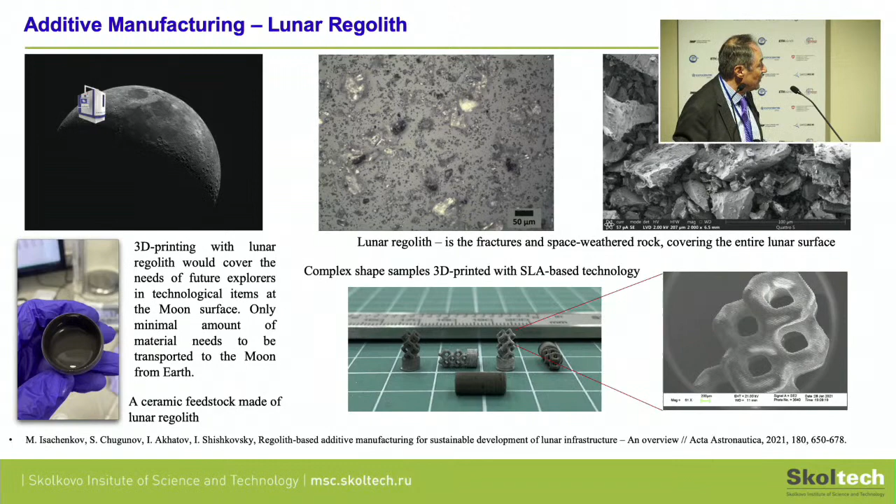And it is possible to print with regolith. It is shown here, and in the picture you see microscopy pictures of the products that have been made, kind of mimicking biological implants just for fun. We didn't pretend to make biological implants from lunar regolith, but it was just something to print. And once we started this, we published a very exhaustive review on this subject in Acta Astronautica.

Now, having all these tools for additive manufacturing, we found a little bottleneck in the development of this technology. This is in the software. When you normally use 3D printing, you use standard software to process three-dimensional images to be able to do the printing. If you would like to change the design, it normally takes a lot of time for skillful people to sit in front of a computer and redo the three-dimensional design. For skillful people it is possible, but it takes a lot of time.

At the moment when you decide to print a very sophisticated fractal structure, with a lot of pores at different scales, it becomes a real bottleneck. What we suggest, and the direction we're going, is a different mathematical approach we developed in our group, called function representation for 3D modeling. So instead of representing a three-dimensional picture with the so-called finite element approach, we suggest using formulas for that.

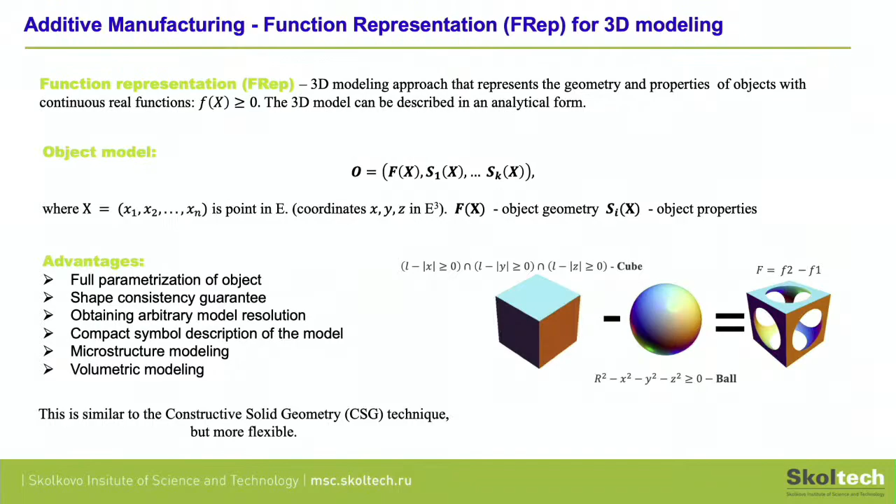And what I would like to show you now is a little movie of how this works.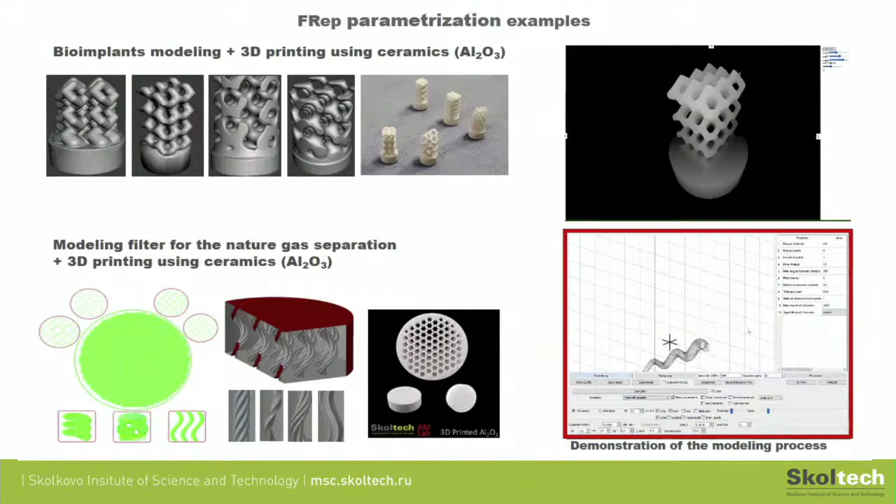This is an implant we printed, and this is some porous media we made for filtration purposes, like filtering media, with a pre-designed porous structure which is impossible to do by regular means, but with functional representation it's done very easily, as you see on the screen.

Now, a simple example of a hip joint, and you saw all this, right? If you want to add a very sophisticated porous structure around it, because for biological implants it's very important to have biocompatibility with the muscles and tissue, this can be done just by sitting in front of a computer and typing. So this, in combination with all the tools of additive manufacturing, can be used as a platform for biological implants.

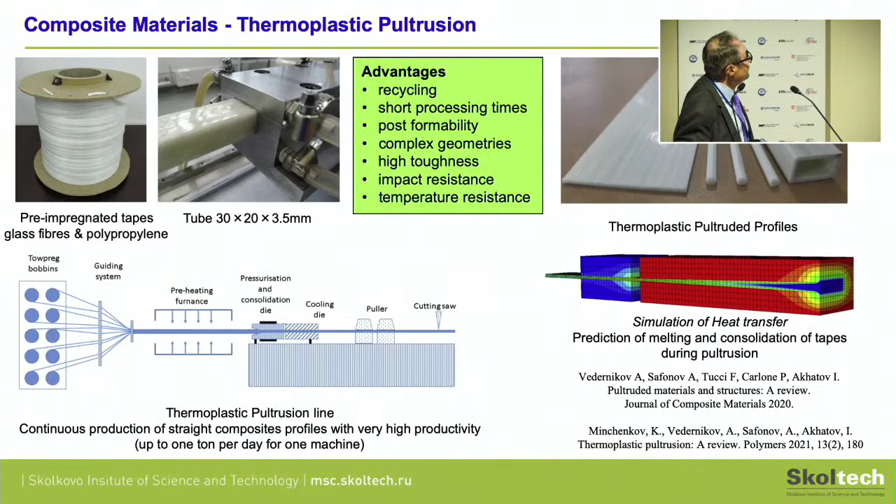Now, the next direction I want to share with you is composite materials. There are many of them, and we normally focus on polymeric-based composite materials, but we selected one special technology: thermoplastic pultrusion.

The schematic of pultrusion is shown in this scheme. You have a lot of fibers stacked together with the resin, and after that they go through the preheating furnace and into the cooling die, and then, with a pulling force of six tons, you pull out a special product, which is shown in the upper right corner.

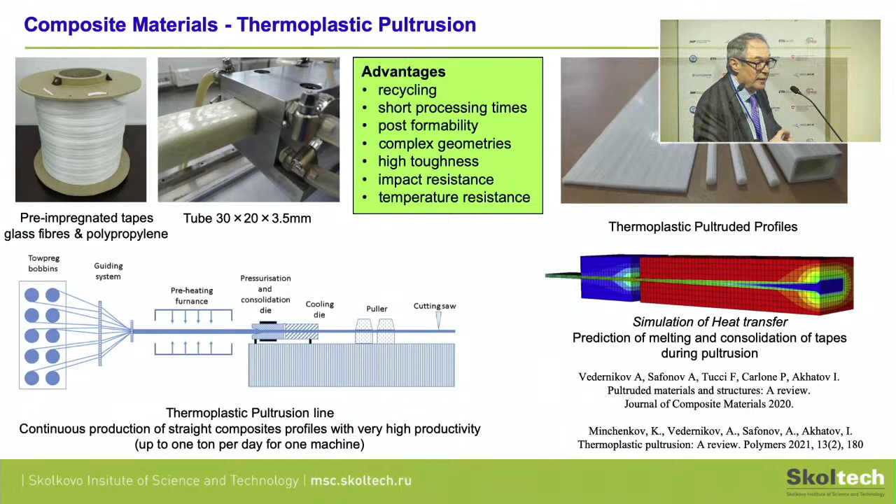You can make it 24/7, so it's going to be long, and you can make any shape. And what we do is basically simulation of this technology to predict the properties of final products.

This is a very interesting tool for civil engineering, and one of the applications I show here is our innovation in Skoltech. In Skolkovo we all dream about innovations, right? And this is one of the simple innovations: we simply suggested replacing the metallic bar from these windows with a composite bar.

And the advantage is clear. Metallic bar is very thermally conductive, it doesn't save heat. Composite material will prevent heat transfer, and therefore it is very advantageous.

We already got 3 patents on material, technology, and the product, and now we are doing a test series of these windows to put on display somewhere and make the industrial justification that this is a plausible technology.

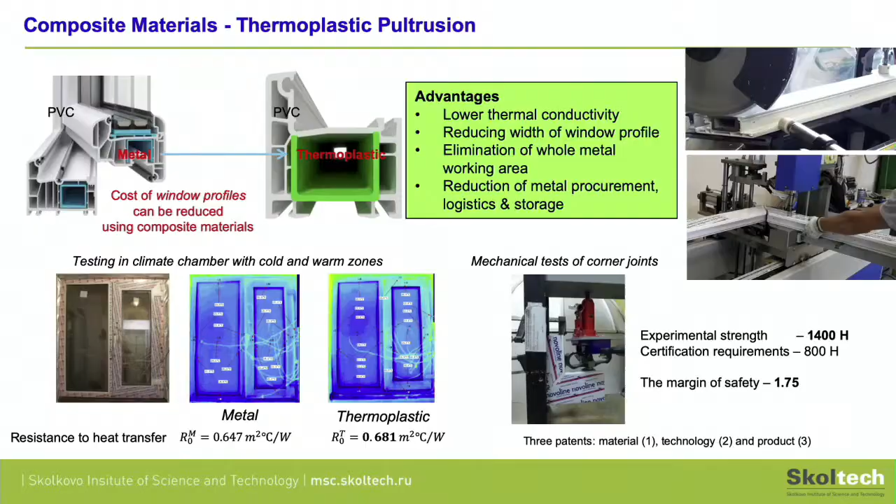A third direction is functional coatings. In Skoltech we have all kinds of thermal spraying techniques installed, and here I show only one, called cold spray. The applications of this technology can be many, but we decided to apply it for special purposes.

You know from physics that if you take two conductive materials and stick them together to make a contact, due to roughness and oxide films between them, the resistance of this contact will be very high. Therefore heat losses due to this resistance rise, and energy is lost. If there are many such contacts, like on a power station or substation, with hundreds or thousands of them, these losses may become detrimental to the economy of the enterprise.

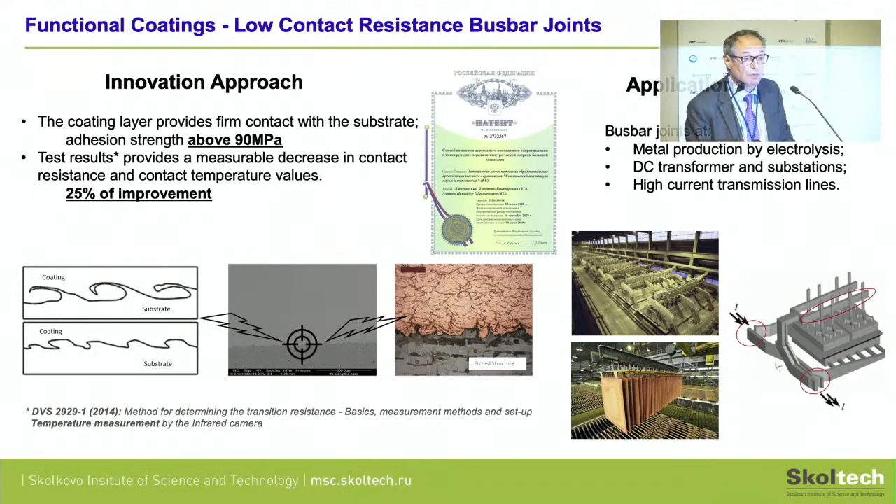We reached a level of adhesion strength above 90 megapascal, which is very good, achieved by cold spraying copper onto the conductive material. This was patented here, and now we are exploring using this for bus bar joints at metal production by electrolysis. There are many of these at DC transformer and substations and high current transmission lines. So this is one of the plausible applications of cold spraying technology.

However, all this has to be done together with governmental structures. We work with the Russian Maritime Register, and also with the United Nations Economic Commission for Europe and the International Maritime Organization. Our representatives are included in working groups in Geneva where they discuss international rules of certification of composite materials for tanks. Now, that's how it works.

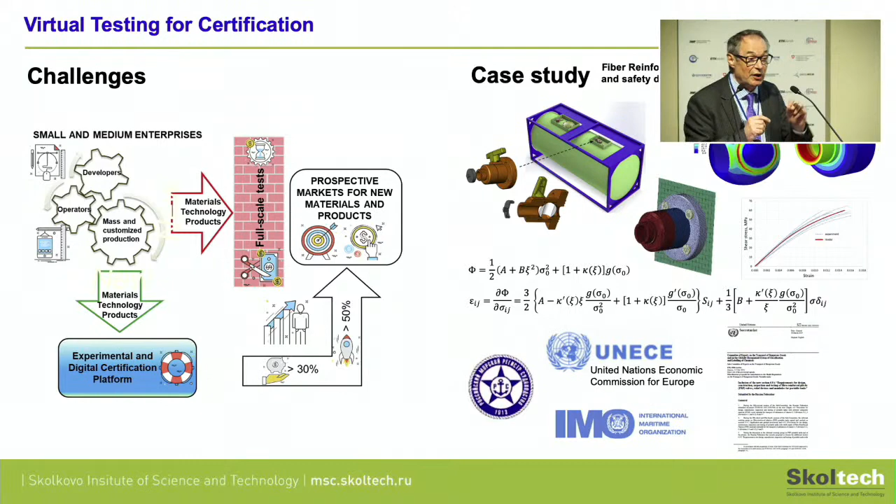This shows some equations just to demonstrate that we do know equations, so they're presented here. We mimic the physics of these tanks, of the valves, and all this stuff digitally, and this goes into the regulatory documents.

On the lower right corner is shown the international note written by our administration to Geneva, and this is being discussed over there in a very specific case of safety of transportation with composite tanks to transport hazardous materials.

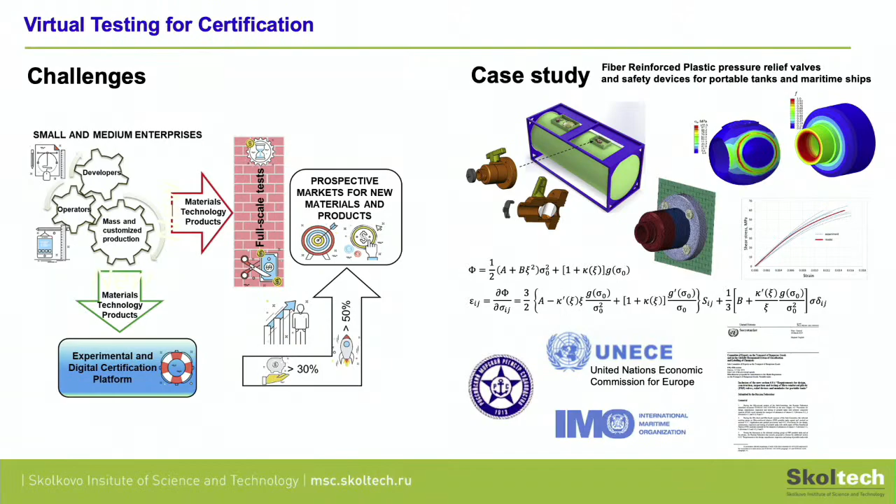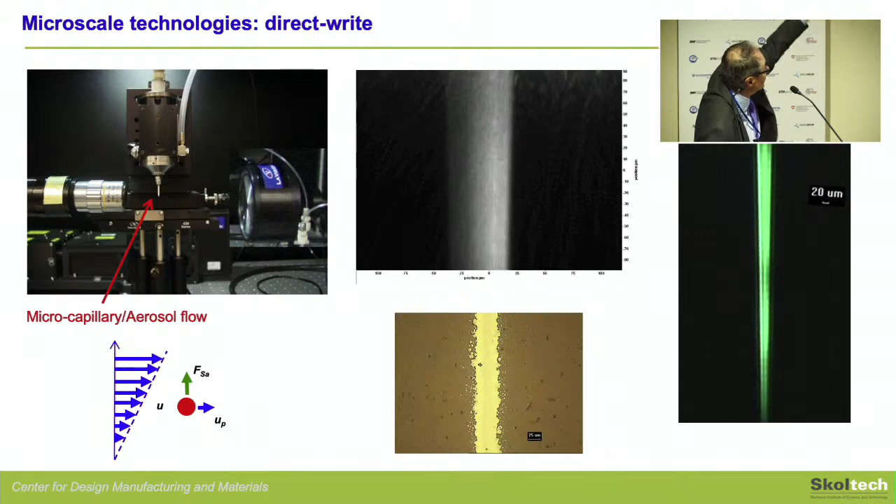That's how it is on the movie - that's how aerosol particles are flying. If you see the bar on the scale, the thickness of this beam is maybe 30 microns, and this is flying down to the substrate. Now on the substrate, these aerosol particles are smashing into it, evaporating, and nanoparticles of ink stick to the substrate. If this ink is made of gold or aluminum, they make conductive wires. This is a possibility. Obviously a lot of physics are involved, and in fact this microcapillary aerosol flow is driven by a very sophisticated system of forces, one of which is shown here, in direction perpendicular to the flowing particles.

Obviously it is all associated with high performance 3D modeling of all these phenomena in nanostructures. One interesting example of nanoscale technology phenomena is graphene nanobubbles. Everybody heard about graphene after the Nobel Prize, right? This is a Russian guy who basically got it, and from his group the picture is taken - these little rings are nanobubbles on a graphene sheet.

Now, how can you imagine - if you ever buy an iPhone and go to the store just to cover it with a protective film, have you ever tried it? You will never get it flat. There will always be something like this on the surface, and you will spend half an hour after that squeezing this out, due to some imperfection. The same happens with graphene on the nanoscale. If you take a stack of graphene and put a single molecule graphene layer on top, you will get all this. Schematically it's shown that something is inside, nobody knows what it is obviously, because the footprint is 100 nanometers. You can test it with the atomic force microscope and so on.

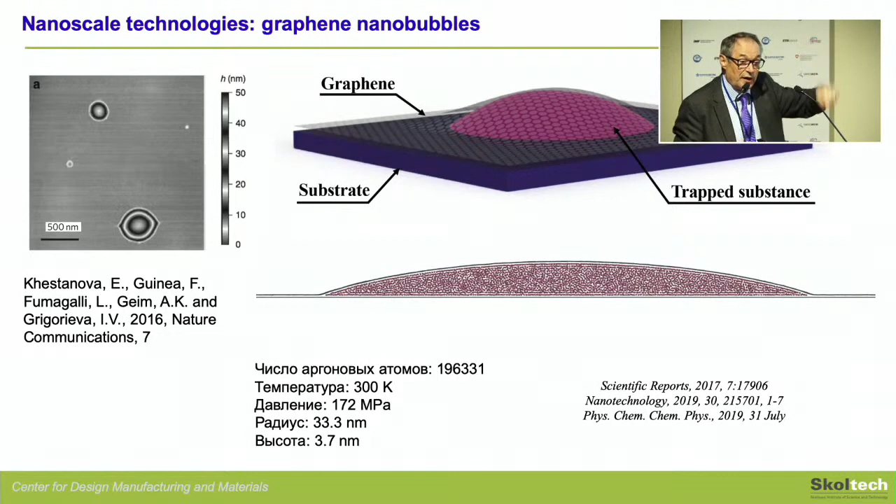But interesting - in what we've done with molecular modeling, assuming there are some argon molecules in there, nothing special, they're playing around. However, you see these all crystallized - they made a perfect crystalline structure. Temperature is higher than crystalline temperature; at this particular temperature argon is supposed to be liquid, but in this nanoscopic confinement it crystallizes. So from this standpoint, this can be treated as a nanolaboratory for material science for various materials, and that's what we also actively do in recent years, publishing all these papers.

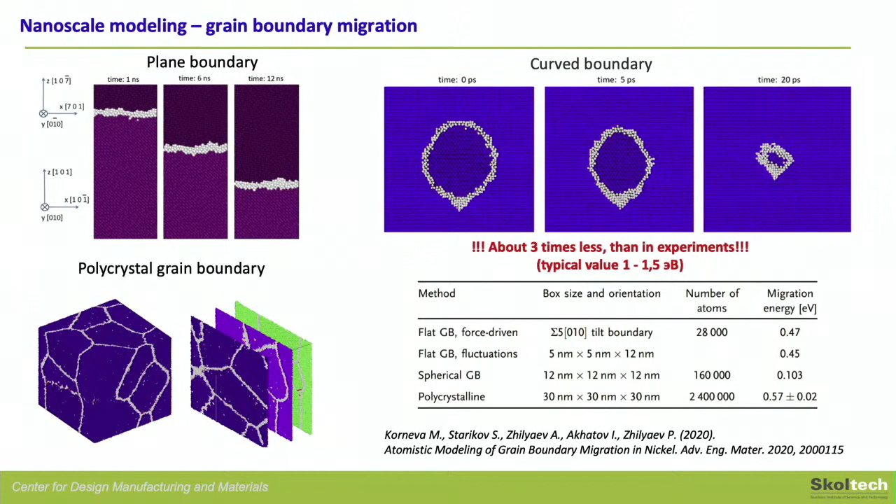Now, what is closer to material science, to metallurgy - molecular dynamic simulation can be used to predict grain boundary migration. You know what grain boundary migration in metals is, and this is an important property, and it's important to calculate the energy of this migration. If you do this molecular dynamics for curved boundary, for plane boundary, you end up with a table. On the right column there are numbers in EV. An actual typical value in experiments is about 1.5 EV. So molecular simulations, first principle simulations so-called, predict only 30% of this energy. That would mean that the deeper we go, the more problems we get.

And this basically coincides with a philosophical concept that I would like to show you now - artificial intelligence for multi-scale materials modeling. If we would like to do a multi-scale model deterministically from the first principles to calculate everything, the entire universe, from atomic behavior - it's a very decent plan, right? While we are doing this, you're supposed to increase modeling complexity.

While you do this, you're facing the so-called Heisenberg principle, reformulated for these particular purposes. It seems that the more factors there are, the deeper and more fully the process will be described. But there comes a limit when the deeper we intrude into the process, the less accurately it is described. You introduce more errors by introducing more parameters.

So what is the bypass? It is a non-deterministic extension. You're supposed to jump to the side and move on with non-deterministic extension of artificial intelligence and machine learning. This is a price we pay for the fact that we cannot go through the forest straight. However, this gives us a lot of optimism, and Professor Wegener also advocates this, together with Professor Neugebauer.